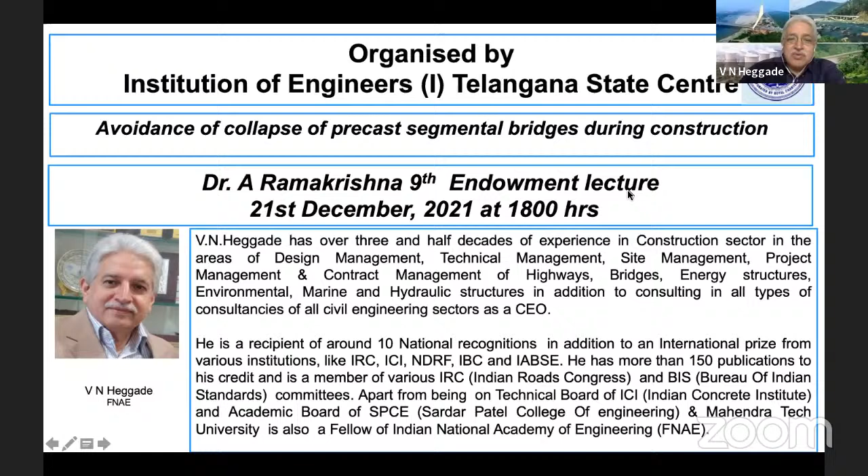In fact, I've chosen this topic today: avoidance of collapse of precast segmental bridges during construction. At a very short notice, I was told to deliver this lecture yesterday, and I was wondering what topic to be chosen. But I knew Dr. Ramakrishna was a very strong proponent of precast construction, and he had brought out a document on behalf of the Indian Concrete Institute on precast construction. That is the reason behind choosing this particular topic. My presentation is basically for avoidance of collapse of precast segmental construction, which has been happening quite rampantly these days all across the country.

The organization of my presentation is going to be as on the screen: understanding designs and drawings in the context of failures during construction, casting of the segments including handling, stacking, and transportation, erection of the segments. Precast segmental construction is basically all about the joints and the temporary prestressing. So I'll be talking about the prestressing as well as the joint systems, in addition to the post-tensioning as well as the grouting aspect.

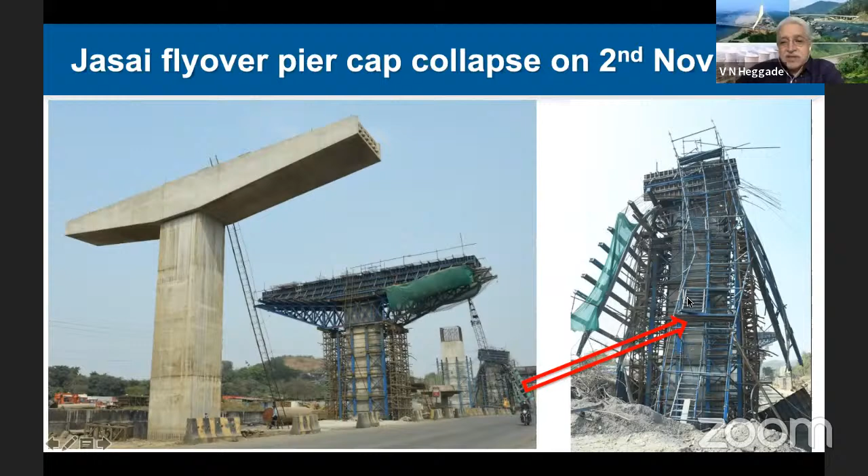As we have been talking about this, the collapses which have been taking place in this country, if you really look at the collapses happening continuously in bridges - this is one of the bridges where during the construction of the cantilever pier, as you can see here, it's around 9.25 meter cantilever pier. During the concreting of this pier it collapsed. As you can see here, the twist can be easily seen.

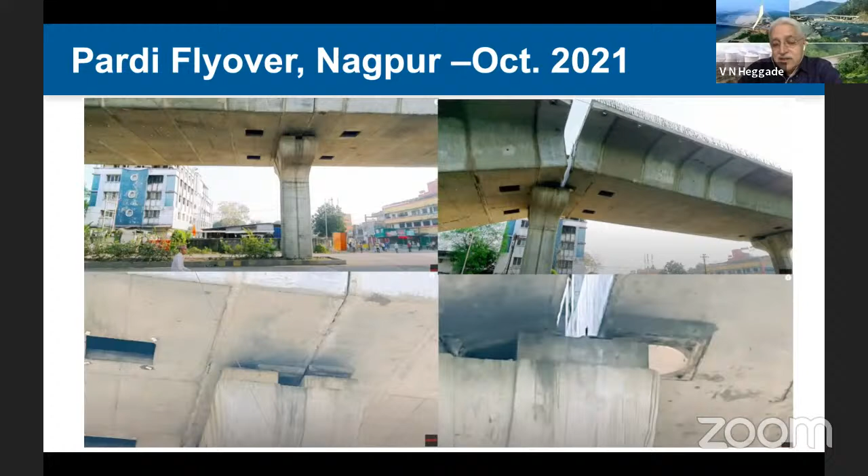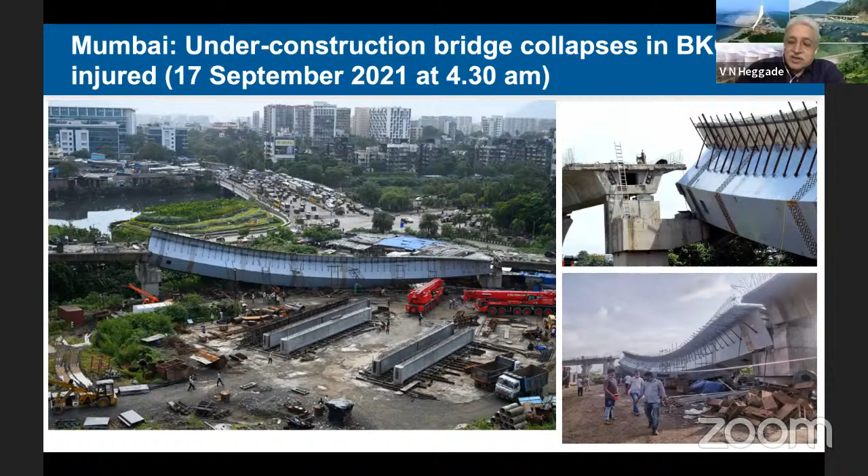That was in November, but in October, one month previous to that, there was the collapse of a bridge during construction in Nagpur, as you can see here. Prior to that, just near BKC, very close to my house, in September, a bridge was overturned. As you can see here, it's a curved tub box girder. Of course it is not a precast segmental construction, but it's a steel box girder during construction which collapsed. The point I'm trying to make here is every month - September, October, November - collapses have been taking place.

If you really look at the history of bridge collapses which have taken place in India, a study has been done by the CSIR, and from 1977 to 2017 they have compiled the data of bridge collapses in India. During that period, it has been reported that 6.12% of the collapses of bridges happened during construction. Out of the various reasons - natural disasters and so many others - out of 123 bridges they studied, 107 bridges collapsed during the construction period, and those 107 bridges are of RCC as well as prestressed concrete, as you can see here. That is the data. And the bridge collapses didn't stop there, it continued, as you can see here.

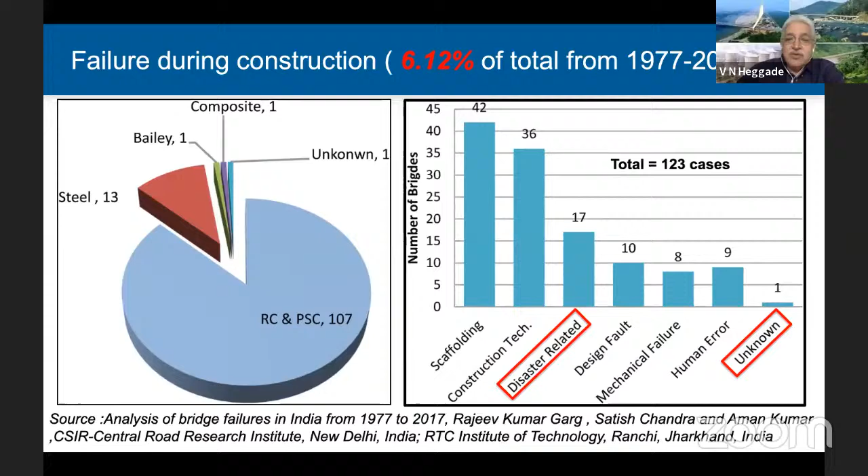2017 onwards, 2018 onwards, unabated bridge collapses have been taking place in precast segmental construction, as you can see here. These are all precast segmental constructions. During construction, collapses have been taking place, mishaps have been taking place. Some of them are collapses, some of them are mishaps. Mishaps in the sense, as you can see here, during the prestressing which is taking place, there is an upward deflection. That sort of thing is happening, you can see that.

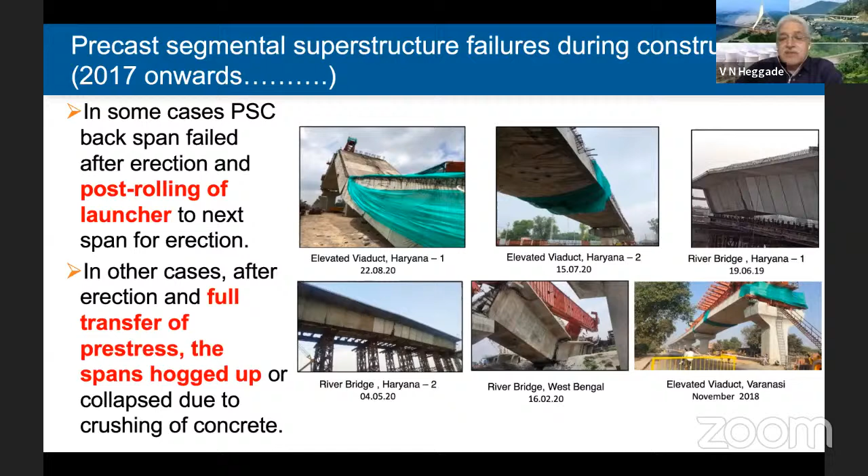So it is all in the precast segmental construction. That too, if you really look at it, majority of them are in the span-by-span construction, for which I'll come to that later.

As late as 28 March 2021, a collapse in Dwarka flyover took place, and it was captured on CCTV very dramatically. I want all the audience participating here to have a look at this very dramatic collapse on the screen, captured on CCTV.

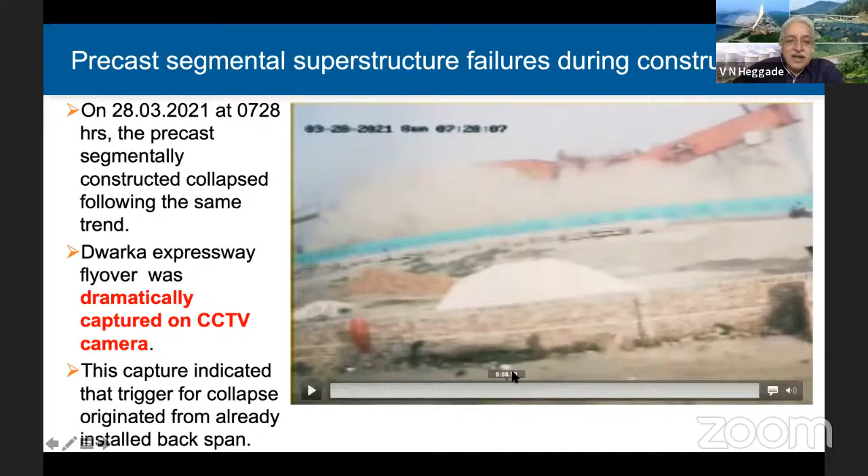There is a dog which was resting on the heap of sand, which ran to safety. Meanwhile, also a traveler was just passing by. I think he was saved because he had just passed before that. This is an interesting capture if you really have a look at it. I'm going to show this a couple of times to demonstrate why this collapse would have taken place.

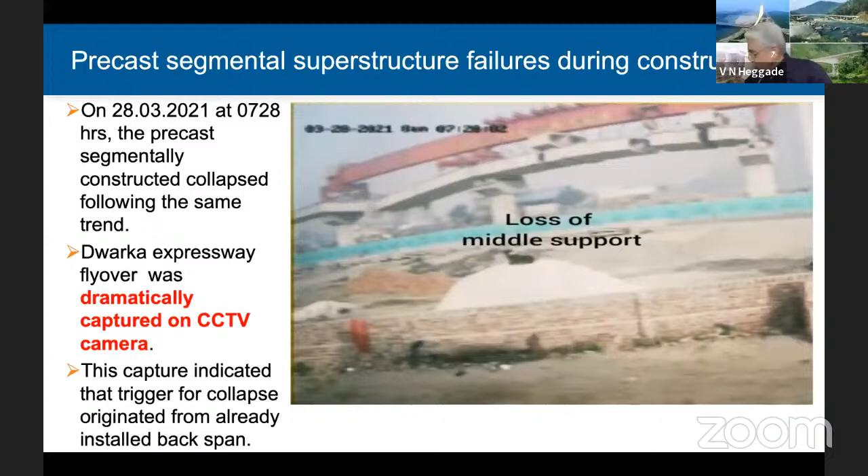So the bridge collapses have been taking place. Let us understand the reasons for this, and let us try to diagnose the reasons for these collapses.

I will take you back to 1958. All of you are aware that Dr. Fritz Leonhardt is one of the evergreen authorities in the design and construction of prestressed concrete. He was a strong proponent of the prestressed concrete technology. Way back in 1958, in his classical book, he came out with the 10 commandments for the prestressed concrete engineer.

In fact, if we just adopt these 10 commandments, or take these precautionary notes given way back in 1958, I think we would be able to stop most of the collapses taking place during construction, in my opinion. Out of these 10 commandments, 5 are for the designers, and the other 5 are basically for the construction people working at the site. I think these 10 commandments have never been as relevant as today, in my opinion.

What are the 5 commandments specified for the designers? Prestressing means compression. Compression can take place only where shortening is possible. So you'll always have to make sure it is free to shorten in the direction of the prestressing. No restraint or constraint should be there - that's what you'll have to ensure. I'll demonstrate that this particular point is so important when talking about the collapses of prestressed concrete bridges.

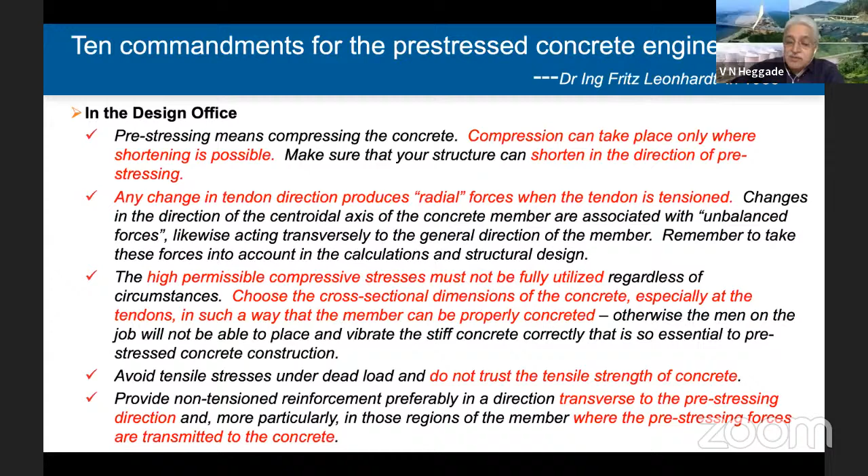He also gives 5 commandments to the site engineers. The prestressing steel is not like reinforcement steel. It has a high carbon content, and as such the ductility of the reinforcement is very less. Also, because of the high carbon content, it is sensitive to rusting, notches, kinks, as well as heat. That is the reason it is always specified or warned that it should never be brought near any heating devices.

Position the tendons very accurately, securely, and immovably. During the concreting, if it's not positioned properly, the position of the tendons gets displaced. Because of that, the eccentricities which have been calculated during the design will not be valid anymore. And there could be additional stresses inducing tension as well as cracks that has to be taken care of. Concrete has to be properly vibrated everywhere.

That is how the concreting has to be done, and that is how the reinforcement detailing has to be done. The concrete mix has to be set so that it is possible to be vibrated and goes to every nook and corner of the shuttering mold. That has to be ensured. If for any reason there is honeycombing and other things, when it is subjected to the prestressing, it's going to get crushed basically. That needs to be kept in mind.

Check that the structure can move and shorten freely in the direction of the tensioning. That's what I explained earlier. That's what he has said.

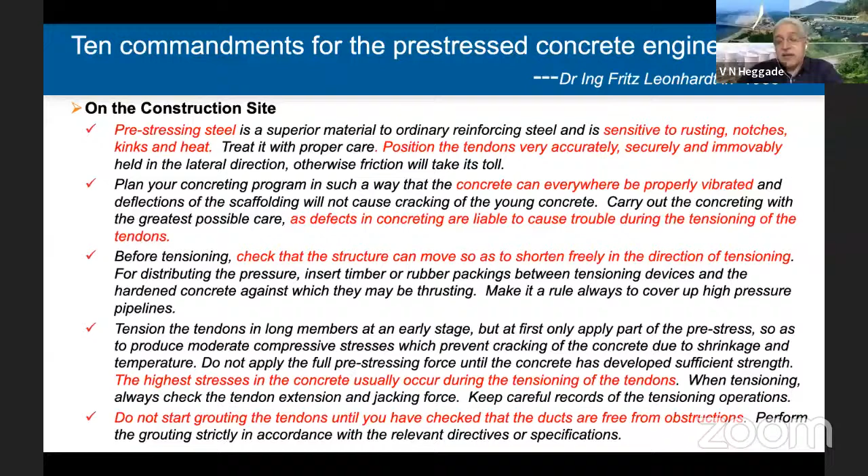Do not start grouting the tendons until you have checked that the ducts are free from obstruction. So these are 10 commandments, 5 for the designers and 5 for the site engineers. If it is religiously followed in the design office as well as the site office, I don't think collapses or mishaps can happen anymore.

Now coming to the precast segmental construction, it has some commonalities, some common features. As you are aware, the segments are cast at a casting yard, brought to the location, and erected into place, as you can see here. Then it is post-tensioned together and made self-sustained. After that, the girder moves to the next location and it continues.

So basically, the precast segments are cast somewhere, stacked, and brought to the location where they have to be translated into reality. There has to be an erection method. That is how it happened.

Most of the failures that have taken place happened because of the span-by-span method of erection. While the span-by-span method of erection was going on, the failures have happened. Also, the cantilever method of erection for precast segmental construction is going on for many extradosed bridges, but I don't see a failure which has been taking place there.

In most of the cases, it's always one-stage prestressing. At the full transfer of the prestress, it was subjected to only one-stage prestressing. Earlier, we used to go for multiple stage prestressing, first stage as well as second stage prestressing. But in most of these cases where failures have taken place, it was one-stage prestressing at the full transfer of prestress. And also, in the majority of cases, they were the spine and wing construction. I'll explain what that is.

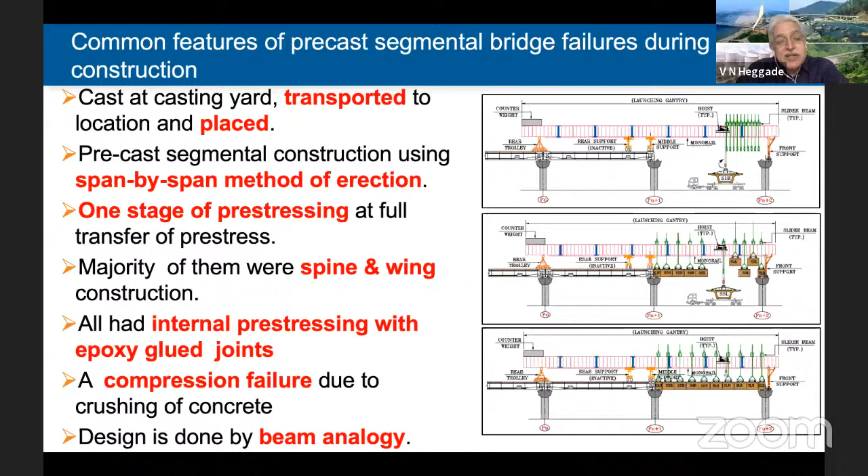Most of the failures are compression failures, as I'm going to demonstrate. And the design is always done by beam analogy - not by the finite element method. The span is considered to be a beam, irrespective of the width of the beam, and the beam analogy has been done.

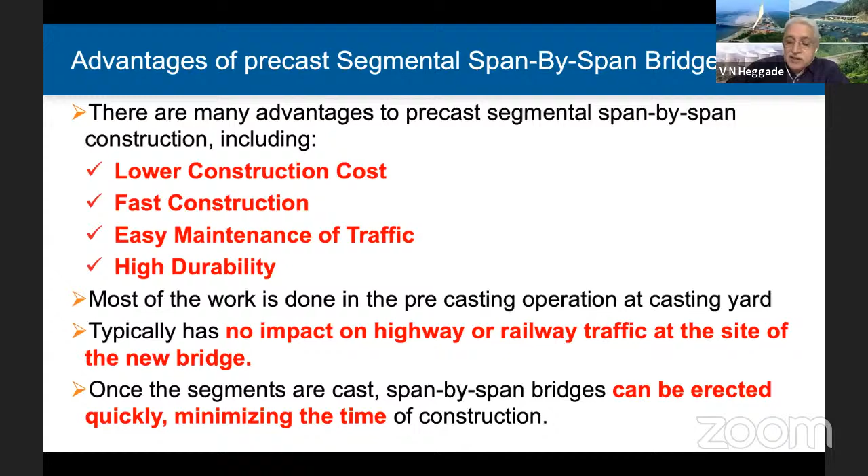That is what has taken place with the beams. All of you are aware why precast construction is normally adopted. I don't want to get into the benefits of precast construction since everybody is aware of why it has been done.

Though it's a detour from today's presentation, I want to mention that precast segmental construction in India started way back in 1971-72. It was first adopted for the Krishna Bridge at Deodurg, which was the turning point in the history of precast segmental construction in India.

It's interesting to compare this with the United States, where precast segmental construction started almost 10 years later. For the Long Key Bridge there, they adopted dry joints with epoxy and external prestressing. Here, in the Krishna Bridge at Deodurg, it was very ingeniously done.

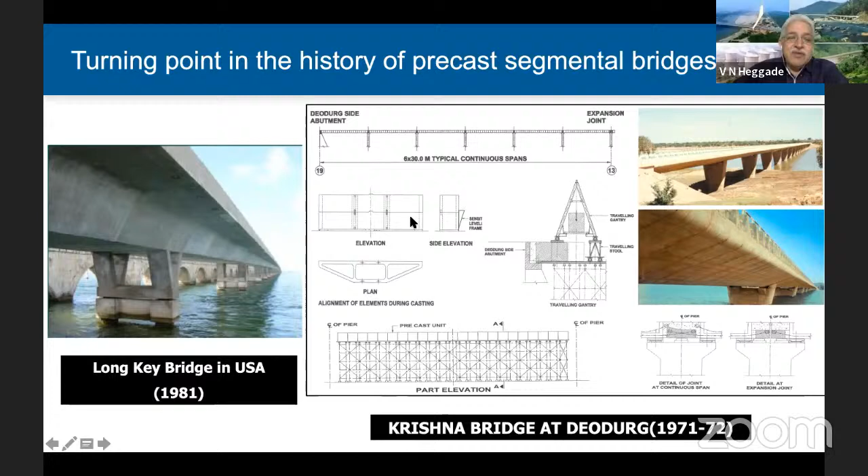Nowadays we know segments are cast horizontally, one after another, whether by the long line or short line method. But here, in this first precast segmental bridge at Krishna Bridge Deodurg, the segments were cast vertically, to ensure they were match cast. The ease of construction was perceived to be better with this vertical way of casting. It's very interesting to note that.

As the deck width went on increasing, traffic lanes also increased. Earlier, in the Krishna Bridge at Deodurg, the width of the deck was around 5.5 meters. But we had to cater for 2 lanes to 3 lanes, 3 to 4, 4 to 6, and from 6 lanes to 8 lanes these days.

As the lane requirement increased, it was always felt necessary to make use of the space under the box girder or girder on top deck, and also to have less repetition of operations, so it was preferred to have single piers. On these single piers, we needed a deck whose lane requirement kept increasing.

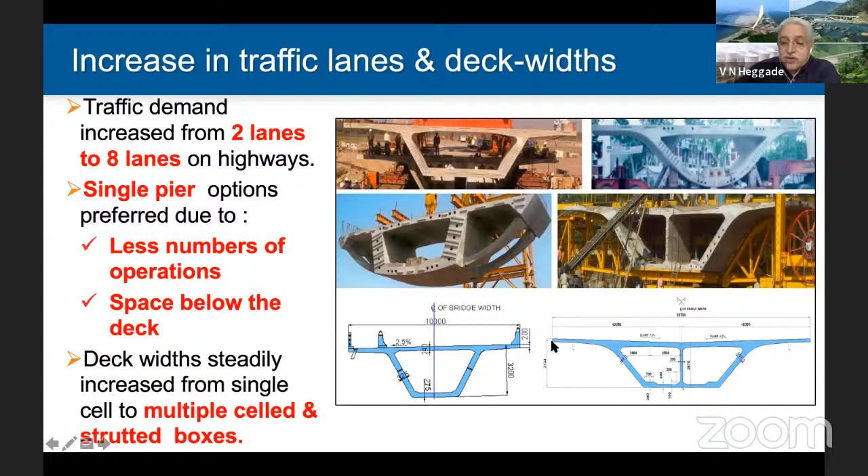It was a single box girder of various types, as you can see here - trapezoidal shape, single cell box. As lanes increased, we went for the strutted box as well as multi-cell box. For a 6-lane bridge, a multi-cell box is required; it's not possible with a single cell box, but it can accommodate widths up to 20 to 22 meters.

When traffic requirements went up to 8 lanes, it wasn't only longitudinal segmental construction that was adopted - the engineer is very smart. All of us engineers are very smart, so we decided to also do transverse segmental construction.

It was divided into a spine and wing construction. As you can see here, first the spine was done. The spine segments as well as the wing segments, as you can see, are precast separately. The erection of the spine unit is done first, then the wing segments are brought to the site and transversely prestressed. So it's not only longitudinal segmental construction, but also transverse segmental construction that was adopted.

For this, when we had a deck width of 34 to 36 meters to cater for an 8-lane single girder bridge supported on a single pier, it was not possible to transport a 34 to 36 meter segment. That's why even in the transverse direction, it was divided into 3 pieces, as you can see here.

This is, as you can see, the JJ Hospital flyover, where for the first time this precast segmental spine and wing construction was adopted, as shown here. This was a necessity at that particular point of time.

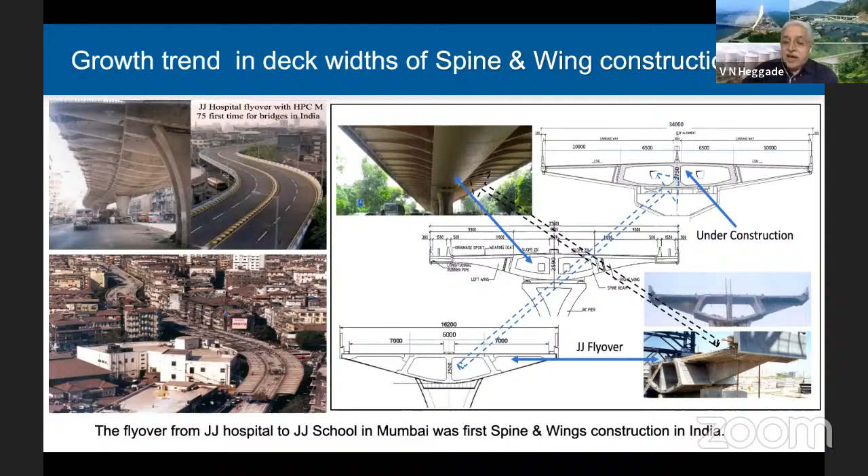The scale effects are responsible for many of the failures that have been taking place, whether scale effects during design or construction, or casting of the segment, etc. This is because of the scale effects. These failures are resulting in mishaps taking place.

What are these scale effects? Scale effect is nothing but enlarging or slendering a tried and tested design when the protective cover of experience is overstepped, so that hitherto insignificant influences become predominant.

What does it mean? When you are designing a small structure, a small width deck, the secondary effects may not be governing the design. As a standard design engineering practice, secondary effects are neglected because they don't impact the design. But as the scale of the structure increases, as it becomes slimmer, slender, taller and wider, the secondary effects start governing the design.

The secondary effects which hitherto were not governing the design, start governing the design, as the designer has become too confident in already time-tested designs for smaller structures. The same principles of design are adopted even when secondary effects have started governing the design, and I think that's when the structure starts giving rise to mishaps, and sometimes even failure happens.

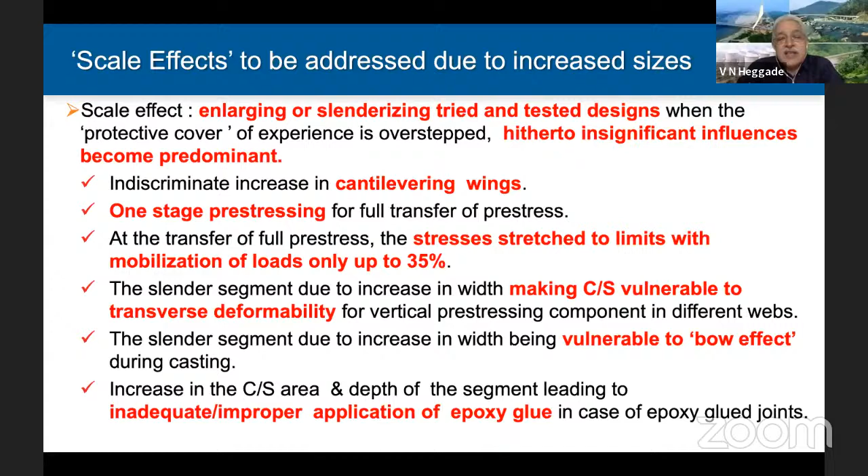Earlier, epoxy glue application had to be done for, say, a 6 square meter surface - the cross section of the segment was around 6 square meters. Now, with larger segments, the cross section increases to 15 square meters, but the time available for application of epoxy glue is only 1 hour, whether it's 6 square meters or 15 square meters. This is another scale effect during the curing section, which will make the structure vulnerable to mishaps.

Now as we can see here, from a segment of 26 meters, we have gone up to 34 meters. Here the cantilever wing width was around 9.1 meters, it went to 9.3 meters. As we go on increasing the cantilever length of the wing, it's around 10 meters here.

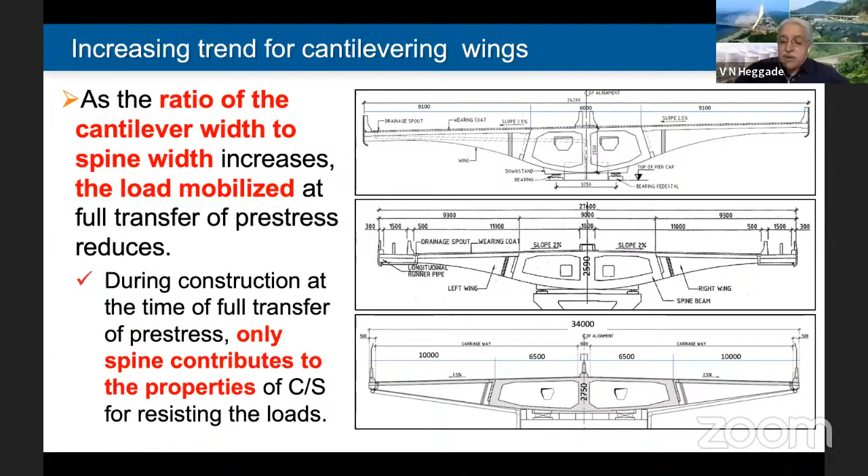As the cantilever length to spine width ratio goes on increasing, the load mobilized at the time of full transfer of prestressing goes on reducing, to only 35%. What I mean is the resisting property of the segment is only the spine. As the cantilever increases, the resisting property of the spine is comparatively lesser for the loads mobilized at that point. So it's always better to keep the ratio of cantilever length to spine width as low as possible, to ensure that at the time of full transfer of prestress, the property contributing to resist those forces is quite high.

Now this segment shows one of the ways of installation of the spine beam. As you can see here, an underslung construction method has been used. There comes a stage where the spine beam is fully prestressed, as you can see on the right side, and it is self-sustaining for the prestress.

At this particular time, it is full transfer of the prestress. One stage prestressing has come, but only the spine beam self-weight has come. All the other weights which have to come, whether it's the wing weight, the superimposed dead load weight, or the live load weight, come later. For that, the prestressing has already been done. At this stage, it is fully prestressed to its limit because of the one stage prestressing adopted.

At that point, nowadays I think invariably we have the span to depth ratio for a simply supported span made continuous by deck continuity around 15 to 18. And for a continuous girder itself, we have the span to depth ratio perhaps 20 to 25. That's normal practice which is adopted.

Those designing earlier using the working stress method are aware that if the span to depth ratio of any beam is less than 12, it acts as a short compression member. If it is more than 12, it becomes a slender member, and as it goes on increasing, permissible stresses have to be reduced to a large extent.

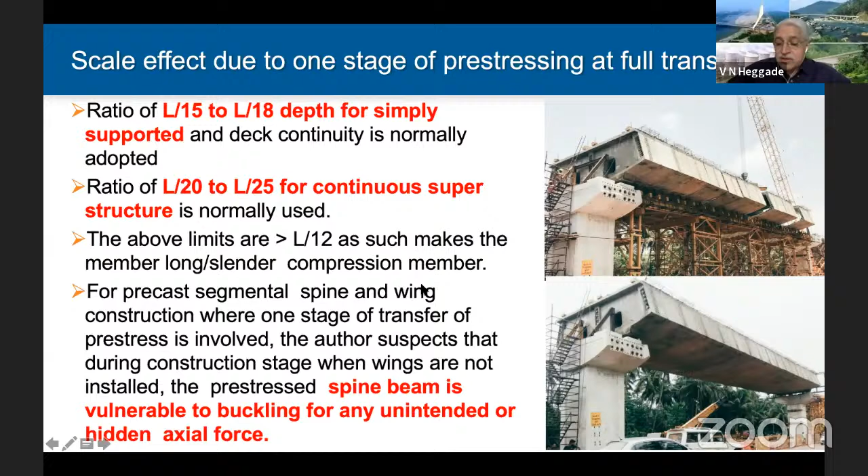So at this point, I think we'll have to relate to the scale effect - it's becoming larger and larger, width is becoming larger and larger, and span to depth may not be less than 12, it is increasing. There is a way to look into this and come up with guidelines as to whether we should reduce the permissible stresses if the L/12 ratio is increasing, similar to the working stress method we are doing.

Just to demonstrate the point I made, there is a cross section here done in three transverse segments - spine segment as well as wing segments, two segments. Here it is cast separately, and here it is cast together, all monolithically cast.

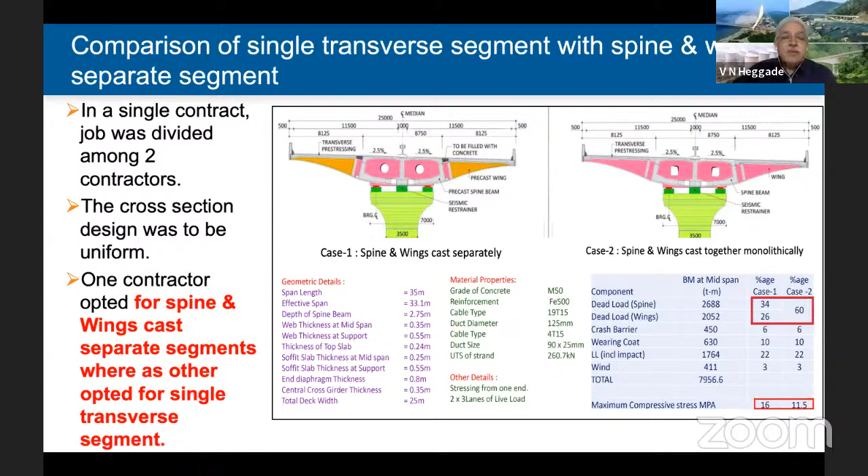For both these cases, at the time of full transfer of prestress, the stresses when the spine and wings are cast separately is around 16 MPa, whereas when the spine and wing are cast together, the stress is around 11.5 MPa. When cast together, it is not stretched to the limits, whereas when not cast together, it is stretched to the limits, as you can see here, because of the one stage prestress at the time of full transfer.

Normally, it is understood that prestressed members are not subjected to buckling. Why are prestressed members not subjected to buckling? Because when prestressing happens, normally the prestressing tendons touch the member surface. When it touches the member surface, as it is subjected to tension, this cable tries to come back to its original profile. As it comes back to its original profile, the member also tries to come back to its original profile, not inducing any buckling.

But for any reason, if this cable which is inside the member is not touching any surfaces, it behaves like any compression member which is subjected to buckling.

The same principle is adopted here. I come out with a proposition: the spine beam, as you can see here, is fully pre-stressed, with one stage of pre-stressing. It is completely subjected to the permissible stresses.

It has already consumed its permissible stresses. When it is already stretched to its limit, any external compression coming on top of this—say, forces from unscheduled or unintended causes due to construction methods or scale effects—the buckling property of this member is already altered because it's fully stretched. For additional unscheduled compression forces, the buckling property is altered and it becomes very vulnerable. Even a small compression force coming later makes it vulnerable to buckling.

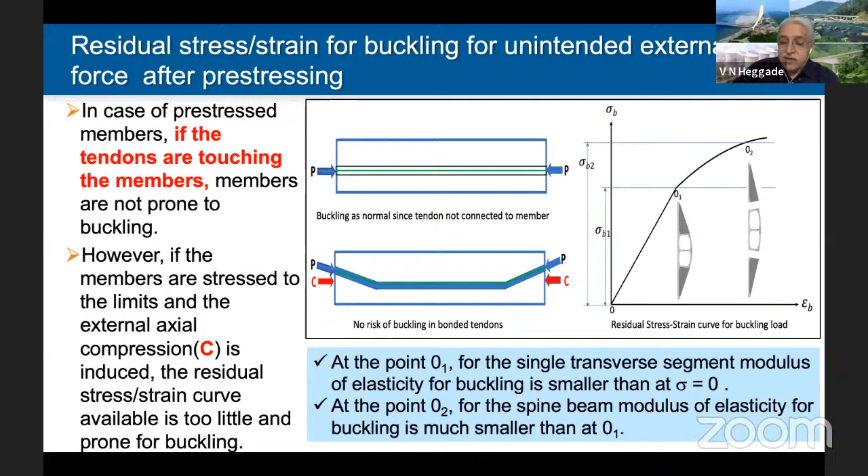What are the ways hidden, unscheduled, or unintended forces can come onto the spine beam? As you can see, it can come because of variation in the prestressing force. Nowadays, losses due to wobble and friction coefficients may be lesser than expected, so the prestressing forces may go up by even 20 to 30%, since the calculated losses may be lesser by that margin. By way of that, the prestressing forces can go up.

Also, there could be temperature variation and temperature gradient not taken into consideration during design, especially during the construction stage. The temperature gradient could be in the girder—the top girder as well as the bottom girder—and there could be a combination of temperature gradients inducing forces into this girder, along with wind load possibly uplifting it.

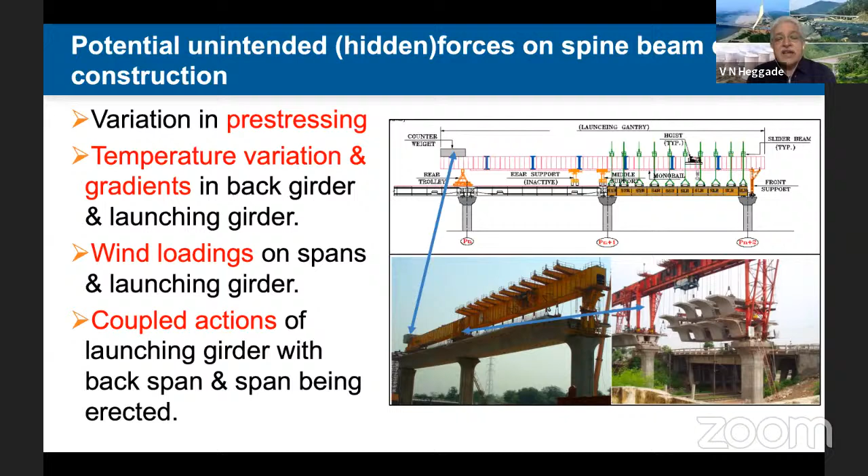So there are many ways unintended and unscheduled forces can come to an already fully stretched beam. We've worked out that in some cases, because of variation in temperature as well as variation in prestressing forces, this could produce an additional stress of around 5.62 MPa. If the member is already designed stretched to the limit, and this 5.62 MPa is added, it is going to exceed the permissible stresses during the service stage.

Also, during one of the stages of the kinematics of erection, as shown in this slide, when the erection of the segment goes on, it has to be stressed so that the span under installation becomes self-sustaining through prestressing. There is a possibility, when the prestressing of this span—hung by the overhead launching girder—takes place,

which is connected to this prestressed girder and the launching girder by rigid suspenders, as you can see here—if the deflection of this girder is less than the deflection of the launching girder, because of the rigid connection, while transferring load from the launching girder to these bearings, there is a possibility of this span being subjected to additional compressive force.

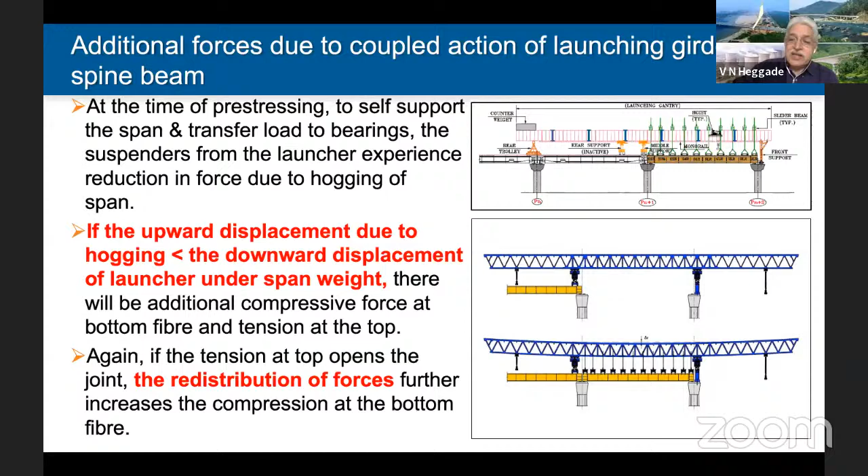So these are some of the unintended, unscheduled forces which can come during the erection of this span. The spine beam is already stretched because of the one-stage transfer of the prestress, fully stretched to its limit, and it is also vulnerable to buckling. All these unintended forces can cause mishaps, so the designer has to be very careful about it.

Not only that, but at this 1/3 or 1/4 section, we assume all these cables are vertically deviating. Because of the vertical deviation, there's a vertical component of the prestressing force here, which we assume to be uniformly distributed between the three webs while doing the design. That may not be the case. The central web may deform more than the external web, causing cracks at the bottom, which may lead to problems during prestressing and later.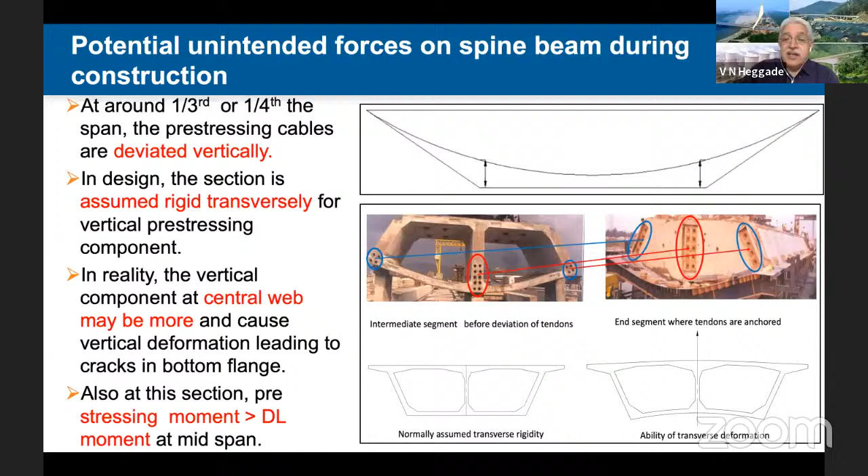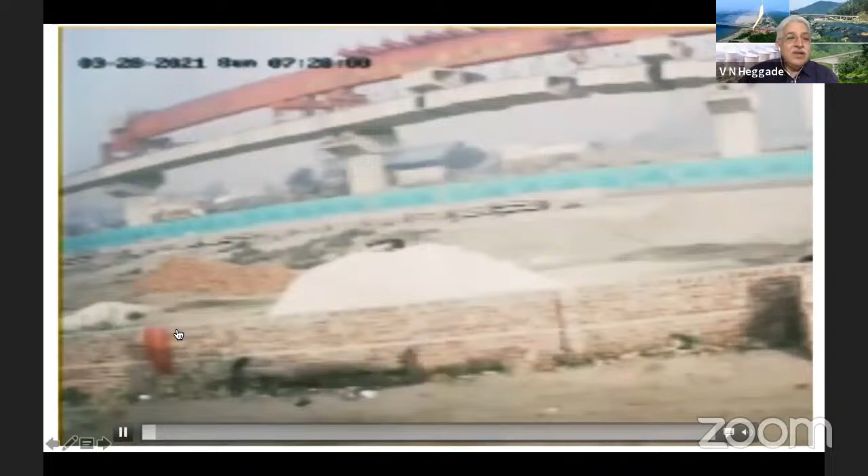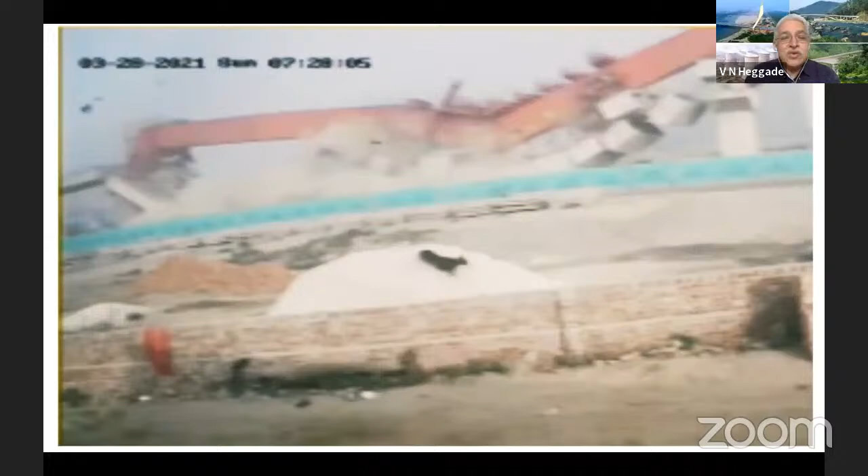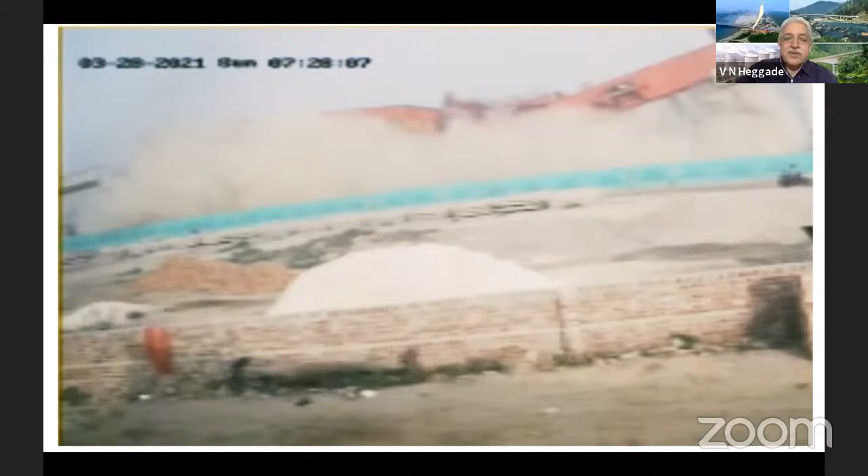That could be the reason why most of the time we see failure take place. Just to make the point again, have a look at the failure in the work that had taken place earlier. If you really look at it, the trigger of the failure is at 1/3 or 1/4 section, and all these cumulative effects could be causing it. All these cumulative effects are because of the scale effects I was talking about—indiscriminately the width of the segments keeps increasing, but the design philosophy adopted is similar to the earlier philosophy applied for smaller sections.

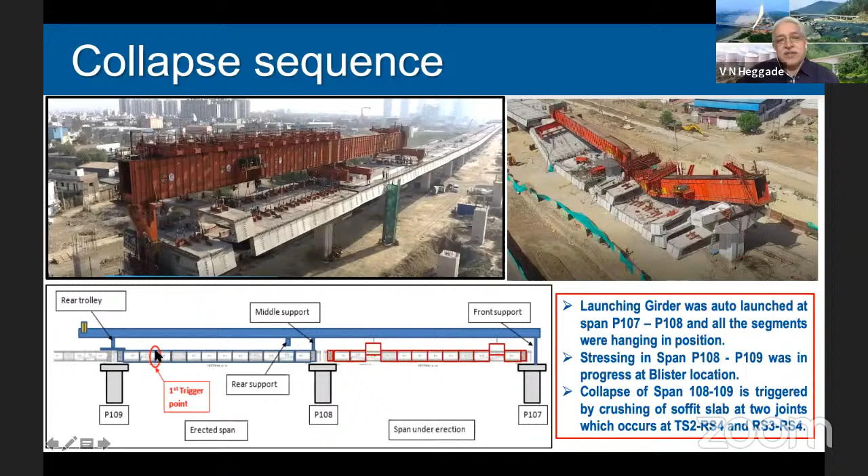So again, just to recapitulate, the segment has failed around 1/3 to 1/4—it's not even 1/4, perhaps less than that. That's where the failure has taken place; this is where the trigger point has occurred. It is because of the scale effects, in my opinion.

The scale effects also happen because of the segment casting as well as handling. That is why we require special concrete mixes as the width and size of the segment goes on increasing. The design mix should be set so that it reduces the heat of hydration and reduces drying shrinkage. It's very necessary to use abundant mineral admixtures like fly ash as well as GGBFS, which reduce heat of hydration and drying shrinkage. These heat of hydration and drying shrinkage effects cause shrinkage cracks during casting, and this has to be made sure doesn't take place.

Also, as the segment size becomes larger, we'll have to really take care of the pouring sequence so that cold joints as well as honeycombing don't take place. The vibration of the concrete is also important, and the casting machine is used in the match casting or long line method of casting.

The shutter vibrators are used, or whether we have to go for some other systems of vibration, we'll have to say. Also, the handling and stacking of the segments in the stacking yard is very important.

Now, what is this bow effect which takes place? This is segment casting. Normally, match casting technology is used in segmental construction, as most of you are aware. In the match cast segment, the already cast segment is used as a shuttering surface to cast the new segment. This particular segment is used as the match cast segment, and this face becomes the shuttering face for the new segment which is going to be cast.

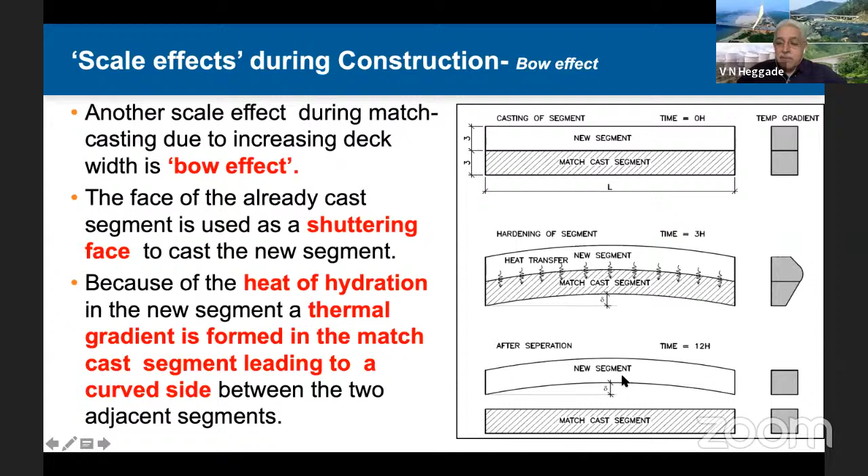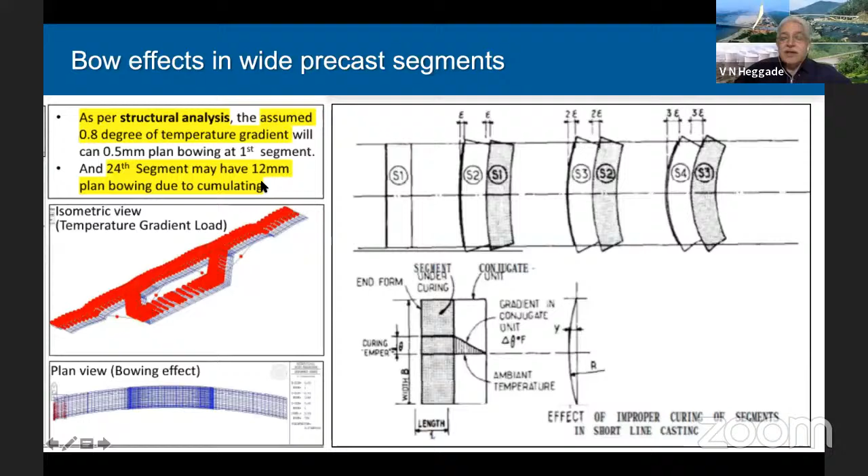We had calculated this in one of the cases where around 24 segments were there, and match casting was to be done. As we go on doing it, for a 0.8 degree temperature gradient, 0.5 mm deflection takes place in the newly cast segment. The cumulative effect for all 24 segments could be as long as 12 mm. When it's in the casting yard and being installed and prestressed, trying to regain this 12 mm back to its original position creates a possibility of cracking.

Another scale effect during construction: as I told you, segments have become larger. In the case of JJ Hospital flyover, the spine surface area was around 6 meters square. If you take present day segments with a width of around 34 meters, the segment surface area becomes around 15 to 16 meters square.

But the application of epoxy for the epoxy glued joints has to be done within the same time - 45 minutes to 1 hour is what you get for applying the epoxy. It has to be done fast, requiring around 40 laborers for a 16 meters square area. The height of the segment has also increased from 2 meters to, say, 2.85 meters, so you will need an arrangement inside the segment with ladders and other things so people can go in and apply this epoxy glue.

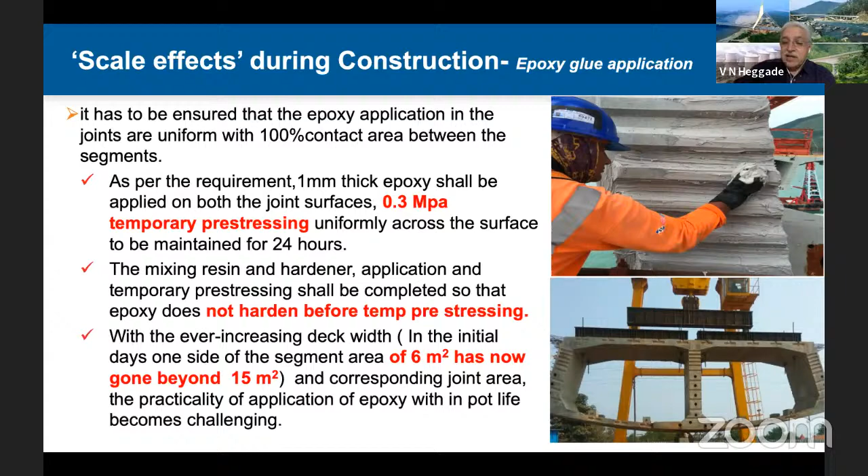This scale effect may result in improper application of the epoxy glue, and when this epoxy hardens, it may not result in perfectly fitting segments with each other. It may act as a seam, leading to concentration of compressive stresses and leading to a mishap. That possibility is also there - again, a scale effect because of the casting of the segments.

Now I'll come to the various construction methods. I don't want to get into the depth of that, but all of you are aware of it. There are two principal ways of doing precast segmental construction. One is the span by span method of construction - normally failures have been taking place in this method, which is why I have confined my presentation to it. The other is the cantilever method of construction, where you can have various segment shapes, as I explained earlier.

There are a lot of design decisions, including the method of construction, that depend upon the shape of the segments, the weight of the precast elements, and the arrangement of the prestressing cables - whether it's external prestressing or internal prestressing.

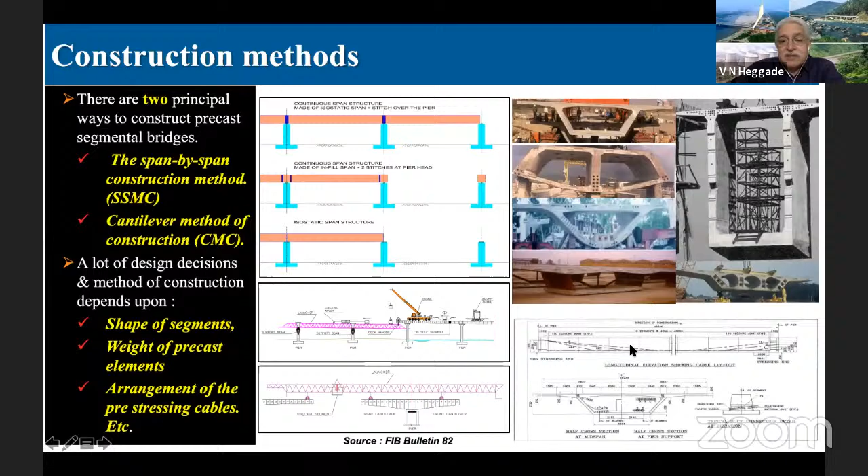The process of construction is match casting of the segments. There could be a long line match casting or a short line match casting. The whole principle of match casting is to make sure the segments are cast so that both segments perfectly fit with each other. That is why one side of the segment, which is already cast, is used as shuttering for the casting of the new segment.

The other process is transportation, handling, and precast segment erection by cranes, gantries, trailers on land and by water. In erection, there are three types: one is the underslung launching system, the other is the overhead launching system, and a combination of the above.

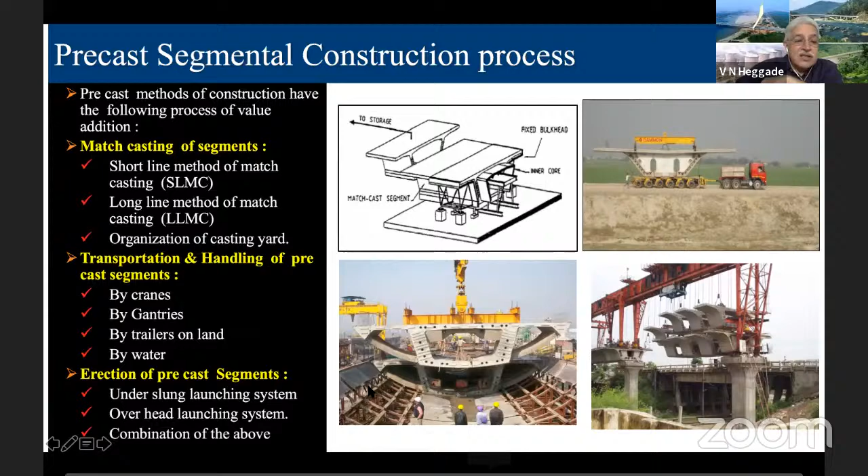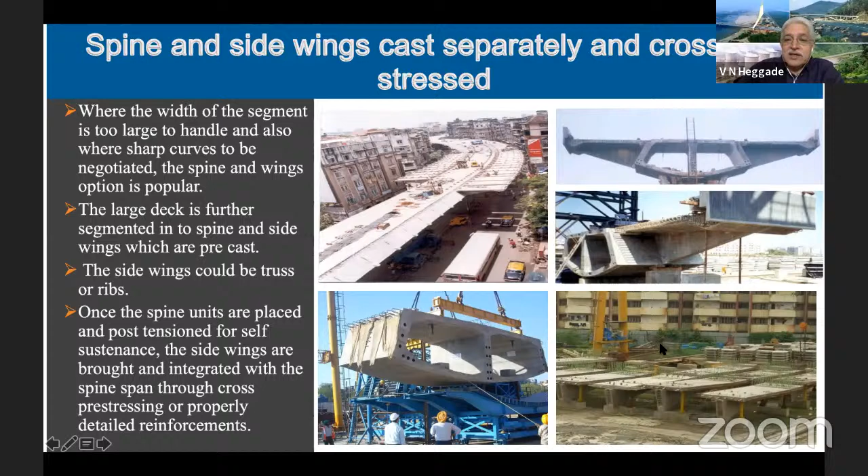I've already explained that the entire deck is divided into three segments: one is the spine segment, spine unit, and the others are the wing units, as you can call them, which are brought to the location and transferred to position. In case of strutted segments, we have the struts, as you can see here.

Struts could be inside also. The struts are already precast, put into the casting machine over here, and again the precasting of the segment takes place. Here, the precasting takes place twice.

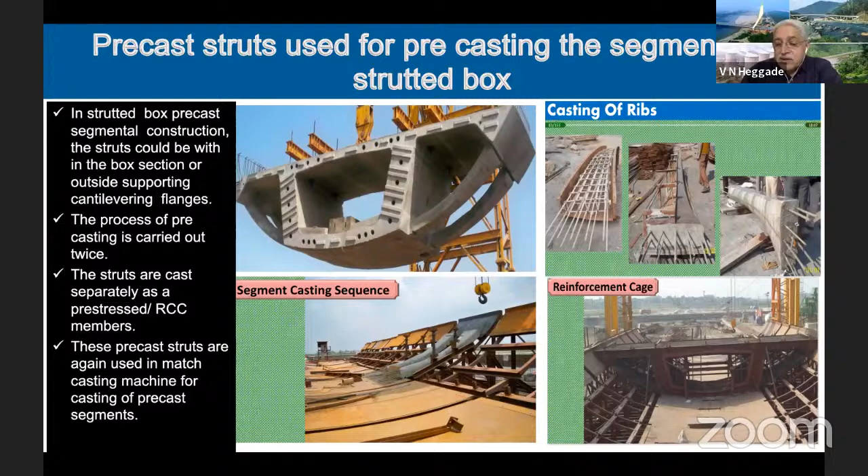This methodology of casting includes both long line match casting and short line match casting. I'm not going into the depth, but I'm going to talk about this casting in the context of the failures which have been taking place.

When the segments are cast, they have to be stacked properly, and the stacking always has to be done with 3-point support. For any reason, if there is a 4-point or 5-6-point support, normally that becomes an unstable, indeterminate support. That's why, even if the stacking is done in 2-tier or 3-tier, the 3-point supports have to be ensured.

Even while transporting the segment on trailers, as you can see here, the supports have to be 3-point. If it is not a 3-point support, there will definitely be cracks in the segment, because during transport it is subjected to a lot of undulations and changes in axes, especially when negotiating a curve, where there may be super elevation and the axis itself changes.

It's also subjected to vertical vibrations while transporting. That's why, if 3-point determinate supports are not given and instead a 4-point support is used, one of the supports cannot be active. It's like sitting on a chair with 4 legs—sometimes one leg isn't touching the ground, so you keep putting padding under it. That sort of situation causes a problem. To ensure a deterministic support, we normally use 3-point supports.

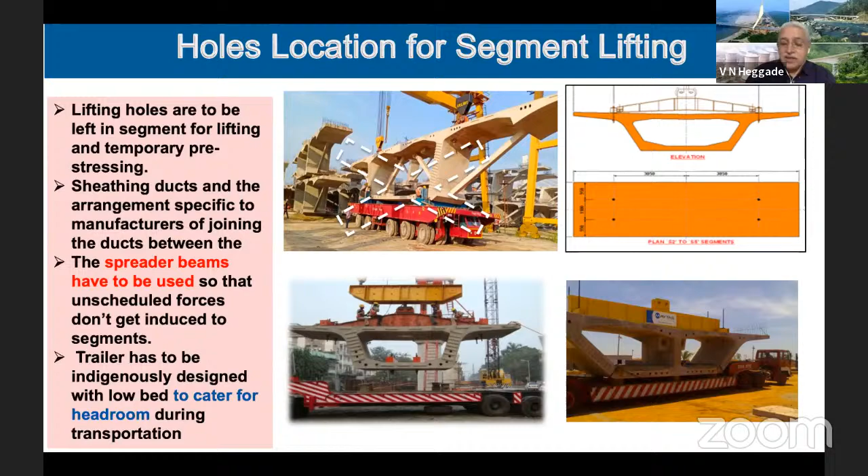Also, while handling the segments, we must always use a spreader beam. If only slings are used, there's a possibility of imbalanced force transmission to the segments through the slings. There are instances where spreader beams are not used while lifting segments, either in the casting yard or during erection, leading to cracks in the segments. This can become problematic and result in mishaps or even collapse later. So we have to be careful, even in the casting yard.

I'll come to quality control now—it's very, very important. As we've seen here, this is one of the match casting, short line match casting machines.

The concrete has to flow inside this narrow shuttering space between two shuttering surfaces—the inner core shuttering and the outer core shuttering. There's no bottom shuttering here; the concreting is done on top. Just to show, the concreting has to be done in these spaces, and it must flow into each and every nook and corner of the casting machine, without any honeycombing and without any construction joint.

Once the concreting is done, it has to be vibrated properly. Since this casting machine is used for a number of repetitions, it is always made sturdy. But when it's made sturdy and subjected to shuttering vibration, I'm not sure to what extent the vibration is effective. If self-compacting concrete is not used for casting the segments, we'll have to be very careful that the mix design is such that it flows into each and every corner of the segment being cast here.

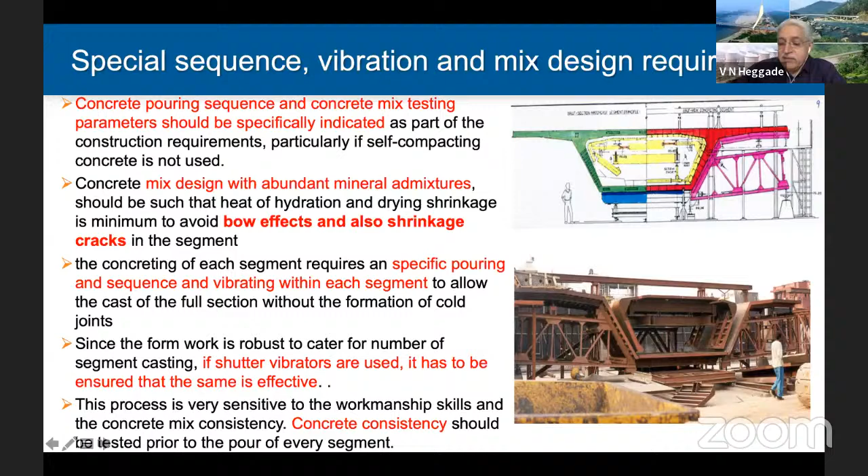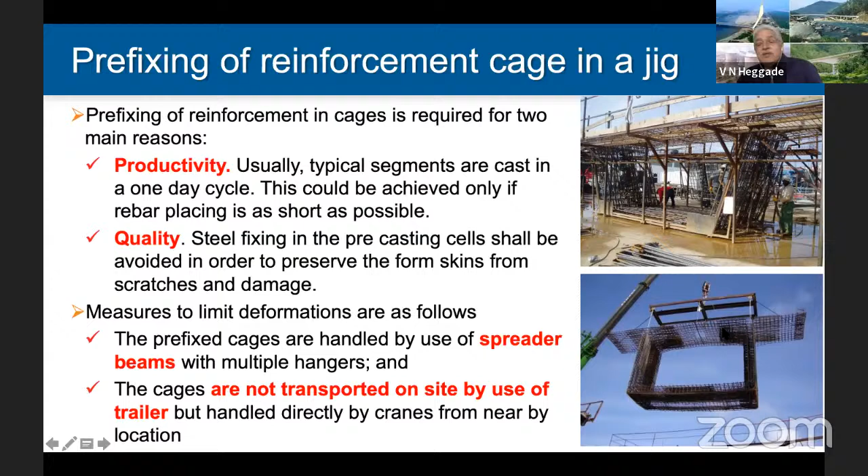That's why you have to make sure the prefabrication of these cages is done very close to the casting machine, and transportation is always done using cranes and a spreader beam. As you can see here, we should not use a trailer for transporting these prefabricated cages. If you use a trailer, it will be subjected to deformation, and the reinforcement of the cages will not be in its original place. So it has to be planned properly.

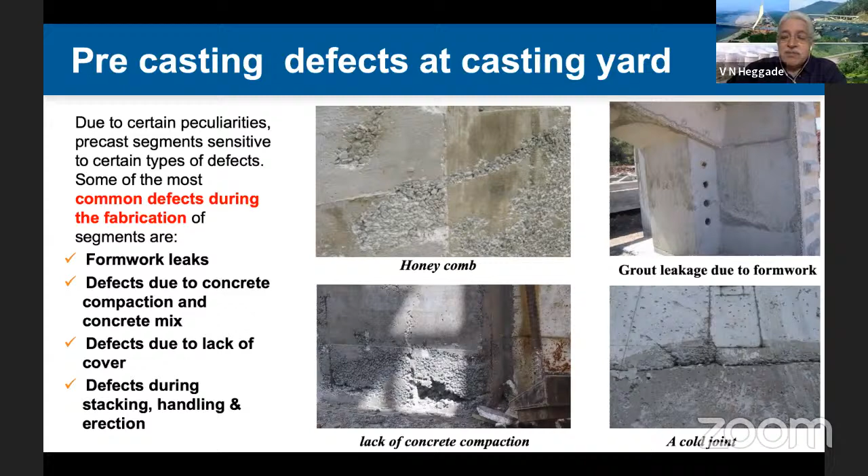The precast segment is very important because it's going to be post-tensioned later, and when it is post-tensioned it's subjected to the highest compressive forces. So any kind of deficiency in the segment is going to create a problem during construction, and it has happened. I've already explained the bow effect to you.

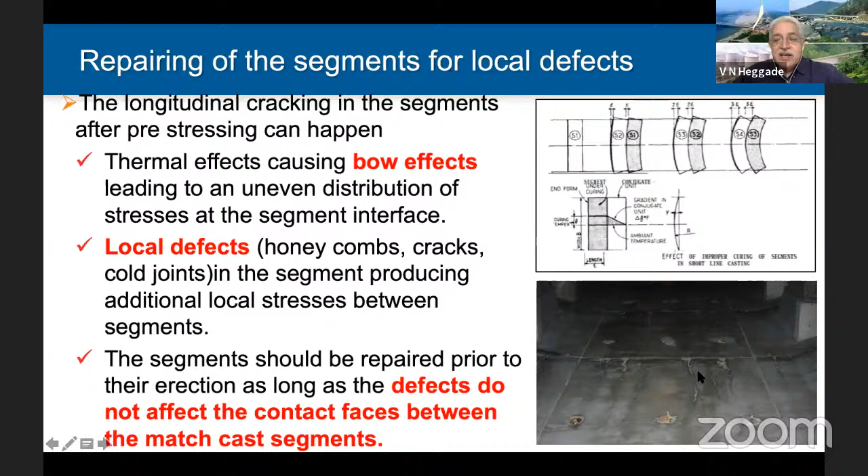If there is a cumulative bow effect in the match-cast segment, for very wide and very slender segments where the length-to-depth or length-to-width ratio is more than 6, these segments, if forced during erection to be pre-stressed to gain their original position, there's a possibility of longitudinal cracks in the segments, as you can see here, and this crack itself may lead to mishaps later. So we'll have to be very careful about it.

Now coming to erection and quality control during erection. As you're all aware, metro construction has become some sort of a cottage industry now. There are 3 types of erection.

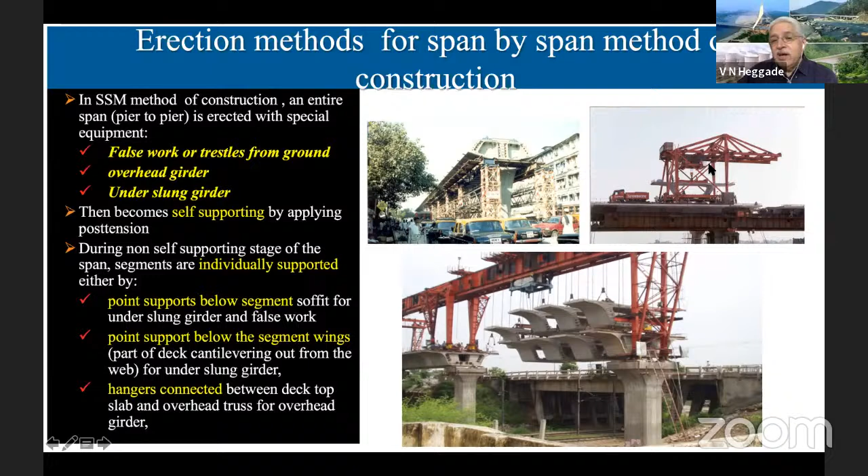One is falsework erection, as you can see here, where precast segments are brought to the location and erected on top of the falsework or staging. Overhead launching system is quite extensively used in elevated corridors as well as metro construction these days. There's also an underslung launching system in combination with what we call a camel gantry or segment feeder, as you can see here.

These are some photographs using the scaffolding as well as the trestle system. These are the underslung systems. In the underslung system, you've got an underslung girder supported on temporary brackets, as you can see here. Sometimes it can be supported on a pile cap or a well cap, as we've done in a couple of earlier cases. On top of this underslung girder, the segment will be placed, as you can see here.

This segment is brought using the trailer, as you can see here. This segment, brought by the trailer, will be handled by what we call a segment feeder, which has an arrangement so the segment can be lifted up, brought to the cantilever, where it has a swiveling arrangement so it can be swiveled transversely and put on top of the trolley on the underslung girder.

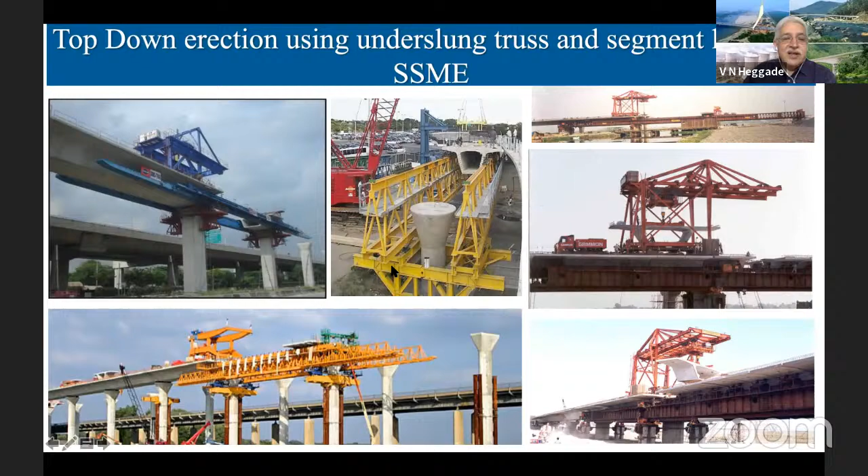A similar system, with variations, can be seen on the left-hand side. These are all sophisticated systems which can be used. The overhead launching system I explained moves on top of the already installed box girder or girder. There are a number of variations of the overhead launching system, and it can also be used for the erection of U-troughs, which has been extensively used nowadays even for metro construction.

I've explained the unintended, unscheduled force that can come here. Using the overhead launching system, the erection of the segment is going on, as you can see. This is a stage where the transfer of prestress takes place to make the deck, which is under installation, by application of post-tensioning.

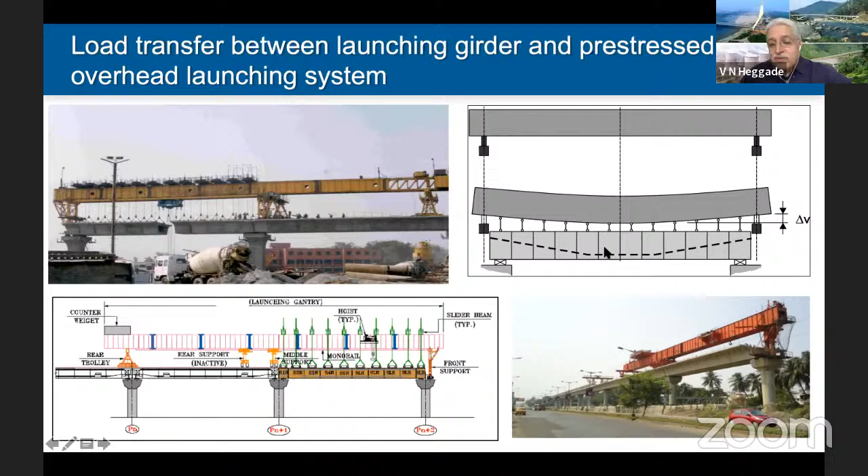While applying the post-tensioning, we have to make sure through operation of the temporary jacks, which this is normally kept on, and also by release of the rigid suspenders, that the unintended force is not induced into the deck under installation, which may create problems later.

Similarly, the unintended, unscheduled force I mentioned can also occur in the underslung erection system. Here it was an overhead erection system, but similarly it can happen here too - when the already installed girder is prestressed, this particular girder hogs up.

When it hogs up, the launching girder tries to regain its original position, and if the launching girder is not deflecting similar to the girder under prestressing, there is a possibility of additional compression induced at the bottom fiber of the girder under installation. You have to make sure that doesn't happen.

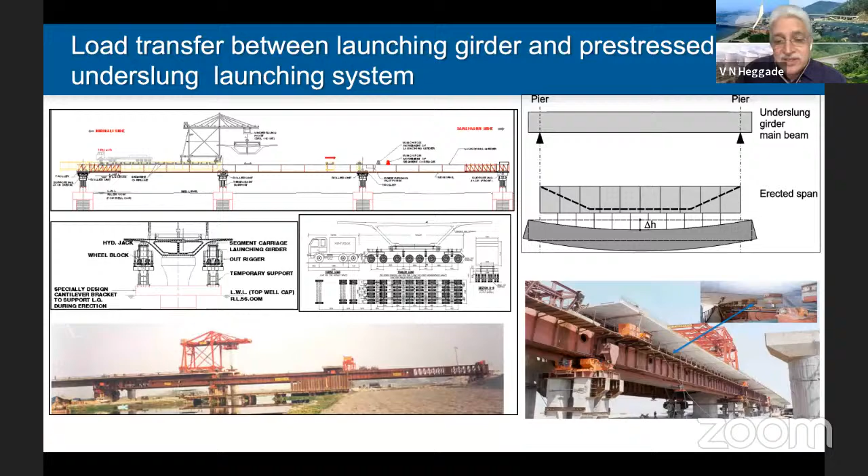Otherwise, because of this, there is a possibility of unscheduled, unintended forces not considered in the design, which may lead to problems later.

It is also very important for us to look at the bearing installation aspects. During bearing installation, we have to make sure that proper mortar pads have been provided with shrink-free mortar under the top plate as well as the bottom plate, and also ensure horizontal orientation and performance assurance.

The bearings have to be placed such that the top surface of the girder as well as the pedestal, with the bearing sandwiched in between, are both horizontal to each other. To achieve this, you provide a wedge in the top plate or in the concrete segment itself by way of a slope, so the bearing is sandwiched between this top wedge and the bottom pedestal.

This surface should be horizontal. It should never be installed in an inclined manner, as you can see here. If installed inclined, there's a possibility of the girder under erection becoming unstable, so that has to be completely avoided.

The bearing also has to be given a preset. Whatever preset has been given, normally the bearing suppliers provide a temporary lock to ensure the bearing is held in the correct position and configuration. Only while activating the bearings should these temporary locks be removed, and they must be removed under the certain temperature prescribed by the bearing manufacturers.

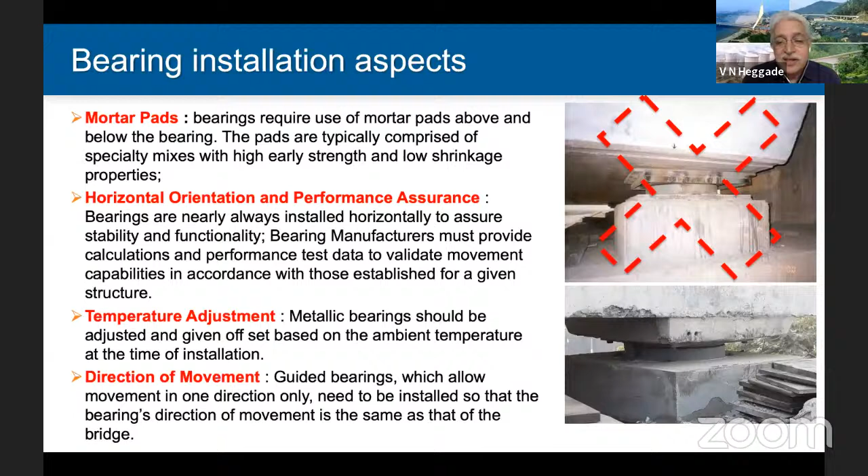If the bearings are not placed in the proper location, if the longitudinally guided bearings are placed where the pin joints or the fixed bearings are supposed to be, there's a possibility of failures. This has happened quite often.

Here is one of the cases, curved spans, where uplift bearings should have been provided but were not. Instead it was provided in the wrong position, and thereby the failures might be taking place.

Here is a case where the grouting is not done properly. And if the grouting is not done properly, your bearing is going to fail, that's for sure. The wedge is what I was talking about, to make sure that the bearing is sandwiched between the two horizontal faces.

The wedge can also be provided by a top plate, as you can see here. It's very necessary to plan this top plate as well as the bottom plate bearing studs, which are going to be inserted into the sleeves in the segments or the pedestal below. The spacing of the studs should allow insertion of the reinforcement, so that congestion doesn't take place and concreting is possible.

Many cases I've seen where it's not possible, the studs are so close by that it's not possible to insert the necessary reinforcement. If the reinforcements are cut or the necessary reinforcement is not provided, it is a sure recipe for the failure later of the superstructure.

These days I've seen some cases where people are using deck continuity only in the deck slab continuity. Normally what is done is the two decks are connected by a deck slab continuity on top, but the girder itself is not continued properly.

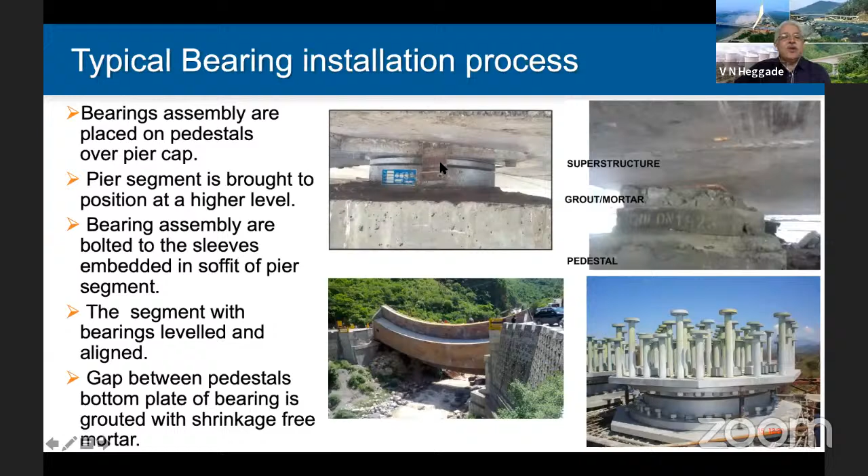There has to be a very categorical method statement stating that until the deck continuity is established, especially for this kind of floating slab or floating span, the locking arrangement has to be there, and there has to be special drawings of the sequence of construction, made very clear to the contractor. If it is not made clear, the contractor will understand that this temporary lock is the locking arrangement provided, and he will argue: I thought that was the locking arrangement, that's why I had not done any extra locking arrangement, I had taken care of whatever was there in that particular drawing.

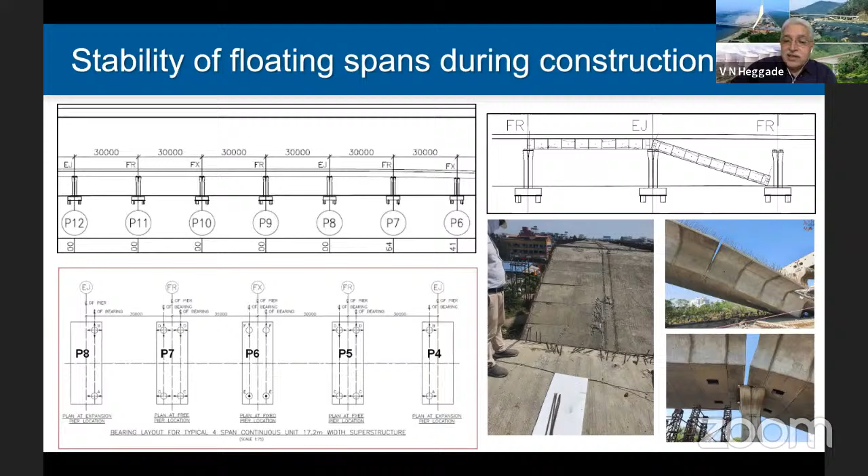So it's necessary to have the sequence of construction drawing very well explained by the designer to the contractor at the site. Now, what is this precast segmental construction?

There could be a cast-in-situ joint. If the cast-in-situ joint gap between the two segments is more than around 200 mm, you may have to provide reinforcement. Up to 150 mm, it may not be necessary to provide reinforcement, but you may have to use fast setting, shrink-free concrete there.

You can also have a dry joint between the two segments. The dry joint, in the sense, is where the epoxy application is not required. Without the epoxy application, you can have the joints.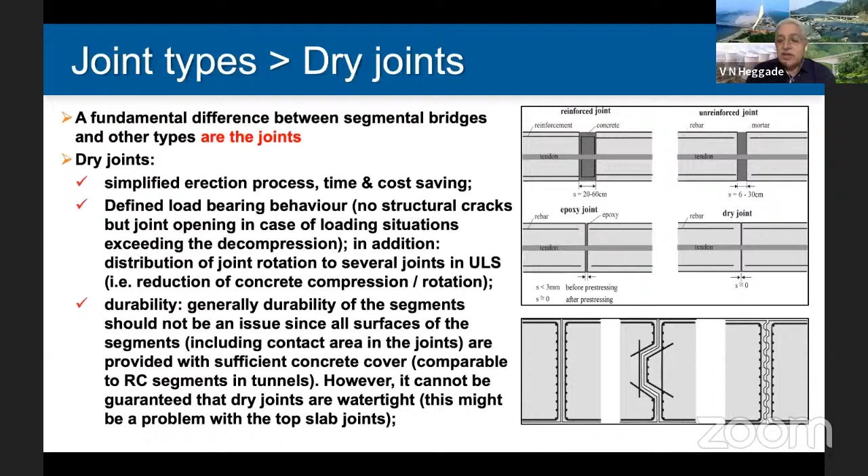There is a detailed guideline given by Indian code makers, SP65, which gives elaborate detailed explanation as to how to make the epoxy jointed surfaces.

In India, the epoxy joint is preferred because external prestressing is not encouraged much, and also there's some sort of psychological advantage: whenever the surfaces are not perfectly matching, the epoxy goes and occupies the crevices.

Even when the shear keys are broken, epoxy can be filled up over there, and it also acts as a lubrication when the jointing between the two surfaces is done. As in the case of internal prestressing, it gives extra protection cover to the cables so that aggressive ions do not penetrate and initiate corrosion. Water ingress into the cable post-tensioning duct doesn't take place, so corrosion initiation doesn't occur - it gives an extra protection layer. That is why epoxy glue joints are preferred in India.

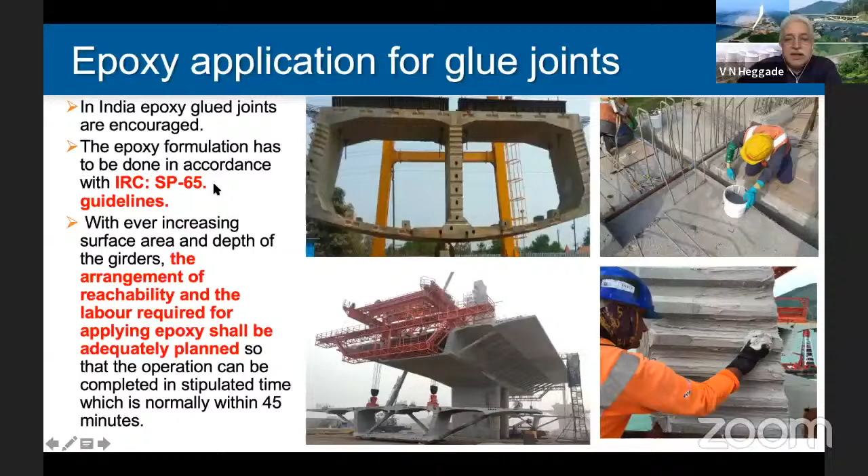I told you that very detailed specifications are available, a special publication, as to how to apply the epoxy. That has to be followed in the Indian situation. This is some application of the epoxy I have just shown over here.

This is the underslung launching girder system. The segments are brought, as you can see here.

They are dry jointed first. After dry jointing, make sure the segments are separated out. After that, the application of the epoxy takes place. It's manually applied. Of course, this is not a good photograph because the safety is not followed over here.

Safety shoes are not worn. Then the temporary prestressing will be done using the temporary prestressing devices which have been provided in the segments. The temporary prestressing is done by PT bars, basically provided, and by threading that.

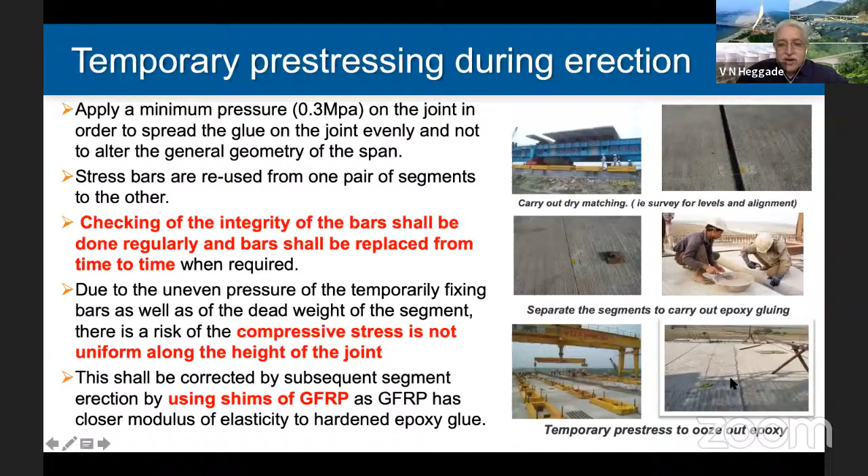The temporary prestressing is done in such a way that the epoxy oozes out, and the oozed out epoxy has to be swabbed perfectly so that this epoxy doesn't get into the post-tensioning ducts, which may create problems later, and also so that it doesn't fall down.

It has to be made sure that the temporary prestressing is applied both at the top as well as at the bottom, in such a way that the application of the 0.3 MPa pressure is uniform across the section, whether from top to bottom or from left to right in a transverse direction. If the application of the epoxy pressure is not uniform, there is a slanted surface formation over there, which may have to be corrected in the subsequent segment erection.

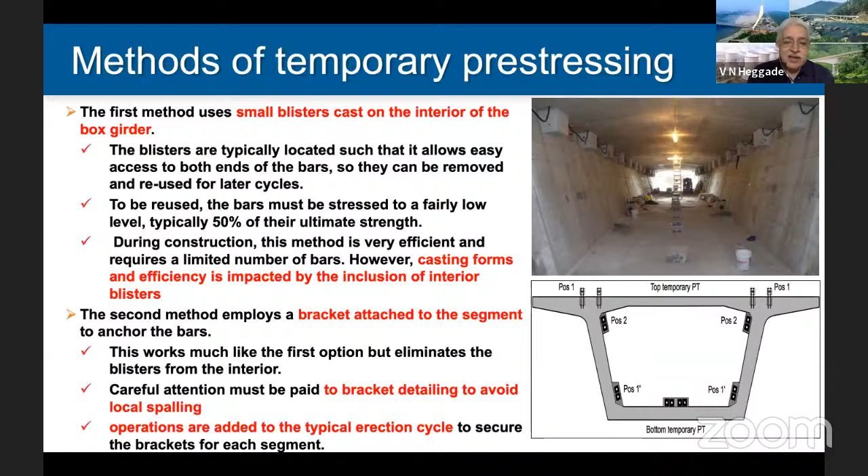This correction is done by way of provision of what we call shims. That shim has to be a GFRP shim. You should not use a steel plate, as the GFRP has the same elastic modulus property as the hardened epoxy, so the properties are compatible with each other. If you use steel plates for the correction of the geometry, there is a possibility of concentration of stresses that needs to be taken care of.

So I'll give you an example: say a 10-kilometer elevated structure is going on with 40-meter spans. The 40-meter span will have 12 segments, so there will be 13 joints. Each of these 13 joints, the application of the epoxy will take around 1 hour using the method which I explained earlier.

After the application of the epoxy, the pressure of 0.3 MPa has to be maintained for 24 hours as per SP65. So 37 hours are required in total for a 40-meter span for the application of the epoxy. For the 10 kilometers, the application of epoxy requires around 385 days, almost more than a year, and the epoxy cost required for the 10 kilometers is around 5 crore rupees.

There are so many problems as far as epoxy application is concerned. Epoxy has to be applied within 1 hour, which is very difficult. It's also costing 5 crore rupees more, and it's time consuming, adding 385 days. The only purpose of the epoxy is to make sure that the internal prestressing which has been provided is safe and not subjected to initiation of corrosion by ingress of water.

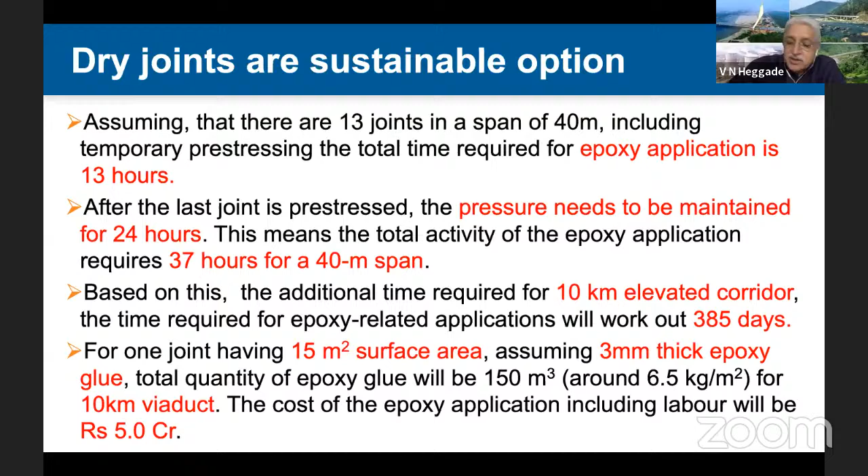So I see as a sustainable solution going forward, external prestressing with dry joints. That will save time as well as money. Also, epoxy is not an environmentally friendly product, so from the sustainability point of view also it is not good. I suggest going forward with external prestressing for the span-by-span method of construction using dry joints.

I'll just come to this finally. Depending upon the ease of construction which the contractor prefers, you can have different PT layouts. As you can see here, there could be girder continuity, and the prestressing could be in the diaphragm, crisscrossing each other. Also, the diaphragm can be prestressed having a separate arrangement, without crisscrossing from one span to another. You can also have separate prestressing tendons, as you can see here.

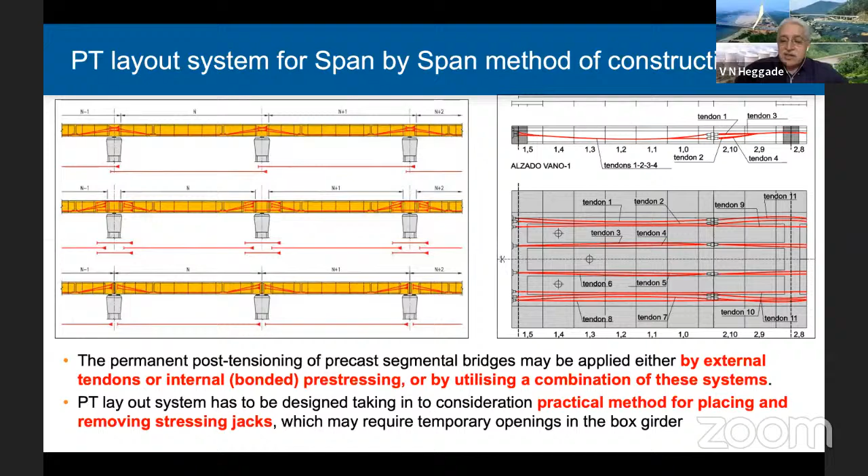The simply supported span made continuous by deck continuity can also be had. That's the easiest way of doing continuous box girder construction that has been followed in India. You can also have span plus one-quarter span, where the coupling of prestressing cables is required. Nowadays this sort of construction, this PT layout, is not preferred much.

I told you about the external as well as the internal prestressing. I prefer external prestressing with the dry joint instead of internal prestressing with the epoxy glued joint.

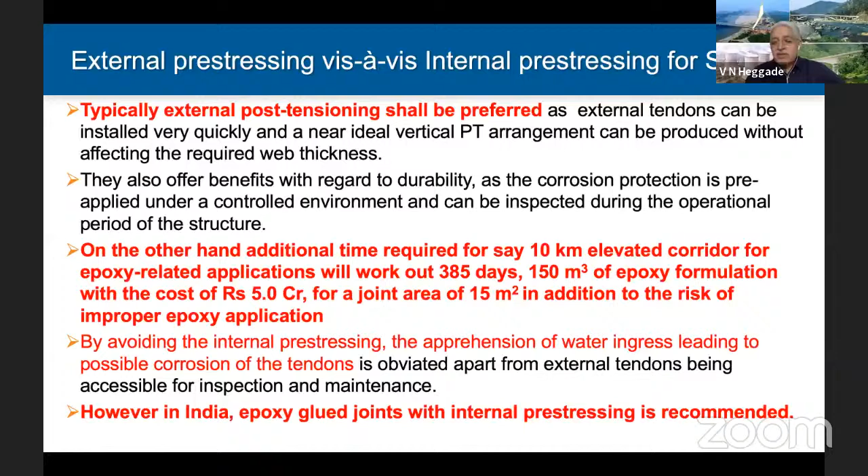From the sustainability point of view, that point I already made. I'm just giving here a case where normally those people involved in the design of pre-stressed concrete construction are aware that you'll have to work out the immediate losses - that's the friction as well as the wobble coefficient.

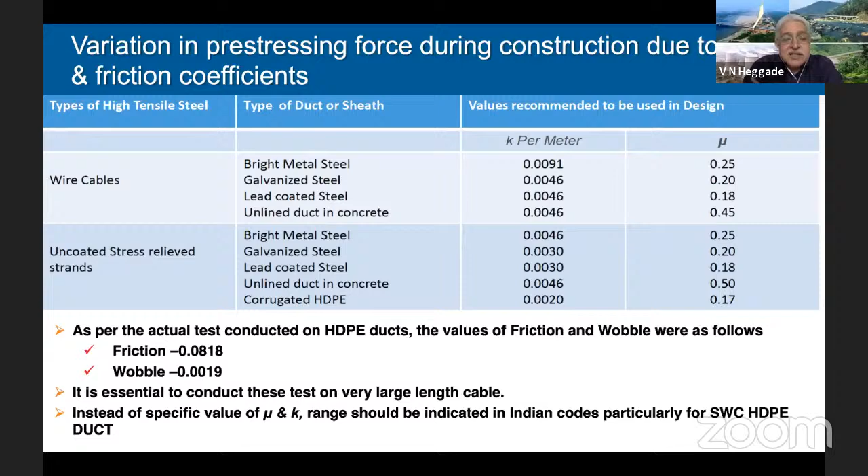So there is a possibility that at the one stage transfer of pre-stress, at the full transfer, the immediate losses may be much lesser than what has been calculated theoretically, thereby giving a 10 to 20% increase of pre-stressing forces, giving rise to higher compressive stresses in the girder. That is the reason it's necessary to establish the friction and wobble coefficient by testing, to exactly calculate the friction and wobble losses.

Good workmanship is needed at the location of the joints. In match casting, there is a possibility of the duct being lower, or sagging. We'll have to secure it so this sagging doesn't take place. Also, when the web concreting is going on and the concrete moves in the transverse direction, there is a possibility of the cable ducts - the post tension ducts within the segments - moving inwards.

All this will create problems during the actual prestressing, inducing forces not intended in the design calculations. Basically, near the blister, you'll have to make sure it is held in position. Proper detailing has to be given uniformly, and reinforcement has to be given so that it takes care of the radial forces there. I always prefer that this curvature part near the blister stays within the toe, within the deck portions, as you can see here.

Also, in case of external prestressing, where blisters are provided as deviator blocks, we have to make sure the steel bends are provided perfectly, so that the external exit angle of the cables coming out does not form a kink later. This has to be fabricated properly and provided in the deviator blocks.

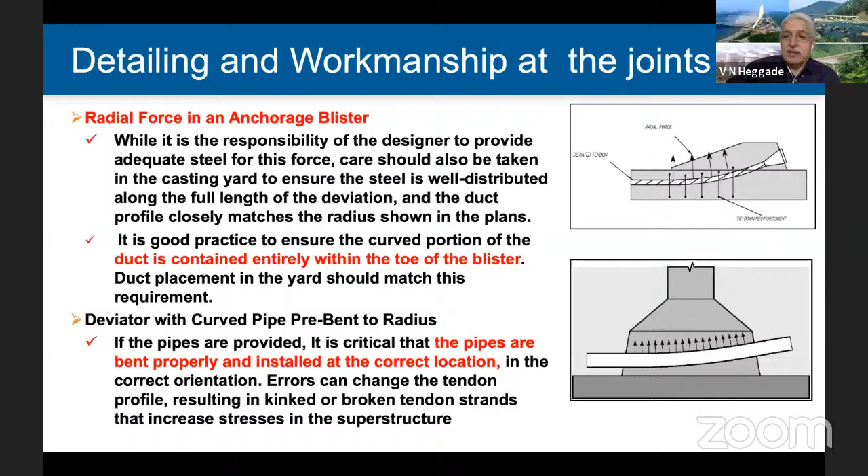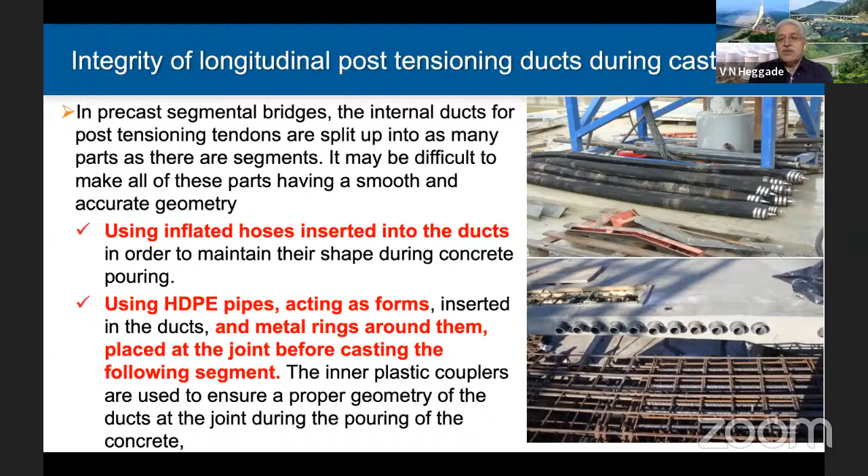To make sure that during construction, the ducts provided in the segments don't get punctured during concreting, you can use inflatable hoses temporarily inside these ducts. Also, sometimes we use an HDPE sheet duct within the provided duct as shuttering, so that the ducts are not hampered or subjected to damage during the concreting and vibration.

You have to make sure that after the segment is cast, it is leak-proof against ingression of epoxy glue and water, also during service. For that, normally a steel band is put in to make a groove, and when the next segment is cast, a rubber band of twice the depth of the steel groove is given, and the segment is cast. Temporary prestressing is done during erection, so that leak-proofness is achieved.

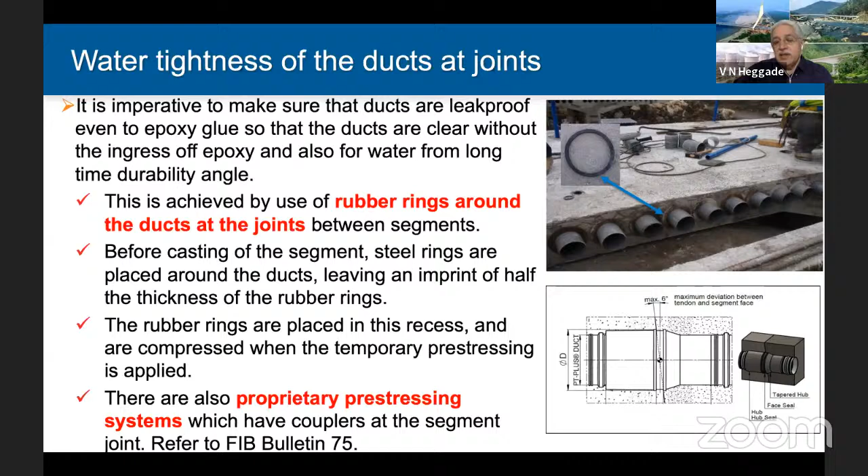Different proprietary systems are also available to make sure the ducts between segment joints are leak proof. This is one of the proprietary couplers used by VSL, and every manufacturer of sheathing duct and prestressing systems supplier has its own proprietary system.

Finally, the rest of the post tensioning as well as grouting is done as usual for regular prestressed concrete structures. There are some very good references available: the Post Tensioning Tendon Installation and Grouting Manual by FHWA, and also FIB Bulletin 33. I suggest this should be referred to by all the participants today.

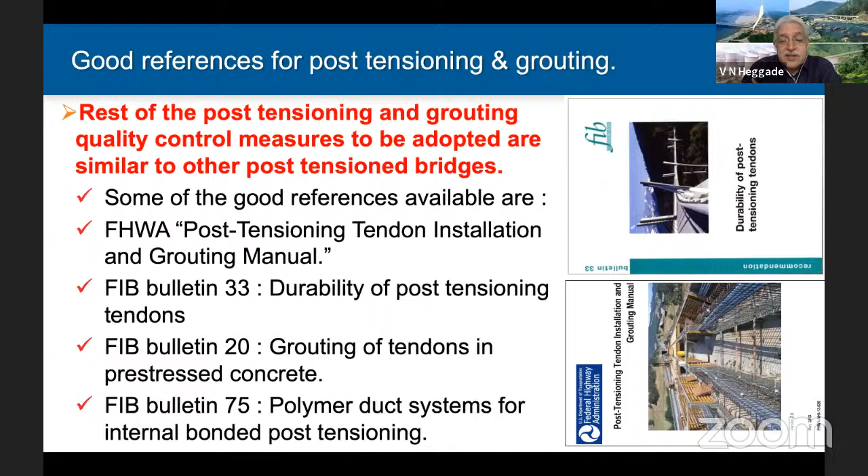The latest bulletin, the FIB 75, also can be referred to for the polymer duct system for internally bonded post-tensioning. And with this, I have come to the end of my presentation. I thank the organizers for giving me an opportunity to give a Dr. Ramakrishna Endowment lecture. I'm really honored and privileged. If anybody wants to ask questions, I'm at your disposal. Thank you very much.

Friends, that was Dr. A. Ramakrishna's 9th Endowment lecture by V.N. Heggade. In fact, understanding design and drawings, the casting of segments, including handling, stacking and transportation, then quality control, erection of segments, joints, temporary prestressing, post-tensioning, grouting aspects, all in one lecture. Sir, you have covered the entire topic in such a minimum time, and how to avoid the failures and collapses of basically the precast segmental bridges during construction.

Friends, before I really open up for the discussion, there is one question from the participant which I would take up first, and then we will open for that. Sir, in the construction of multi-span precast concrete segmental bridges, in-situ stitches are often cast to connect together, and since these stitches are often lightly reinforced, the robustness of the segmental bridge could be adversely affected by the capability of the stitches to resist the large variations in the moments during extreme events. So how to overcome such problems, and with your experience, what evaluations are recommended for the robustness especially?

No. See, normally in the precast segmental construction, near the pier, we have a very small cast in situ unit. In India, the cast in situ portion is not more than 100 mm. Abroad, it is more than 100 mm also. If it is only up to 100 mm, we have got a special mix design for that. In fact, pre-mixed concrete is also available. It sets very fast, and once it is setting, I think it gives a very good concrete over there.